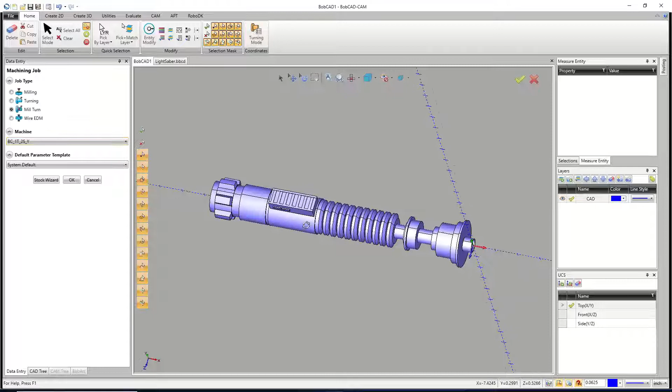Let me go right there, let me get my right view here. There we go. So I'm going to use the BC 1 turret 2 spindle Y, and I'm going to go right here into the stock wizard. I've already set up a tool crib for this machine, so that's one of the biggest reasons I'm going to use it. I don't feel like setting up a whole tool crib again.

So I'm going to try and avoid that. For the workpiece, just going to pick the whole model right there, and that's going to be our workpiece. That represents the final finished part. And then right here, we're going to go create our stock, so I'm going to do cylindrical stock.

I have my part oriented along the x-axis. That's how I like to work on mill turn parts. If you look at some of the examples inside the help system, some of them are standing vertically, so basically your X and Z are already oriented for your part. But to me, that takes a lot more work with pulling edges off and just doing a lot of work. It becomes a bit more complicated.

So I'm just going to start by doing a bounding cylinder. I'm going to tell it that the extrusion direction is in the x-axis, and then I'll tell it to calculate the stock. Now, what I want to pay attention to here is that we get a piece of stock that's actually centered on XYZ0, which means I'm going to have to make my stock a little bit bigger. So the first thing I'm going to do is right here on this XYZ coordinate for the system, I'm going to set those both to 0 so that we're centered right on XYZ0.

What that shows me is that I need to make my stock a little bit bigger. I don't remember if I did 2 1/4. Let's try 2 1/2, that might have been what I used. Yeah, there we go, so we'll go a little bit bigger, and there it is.

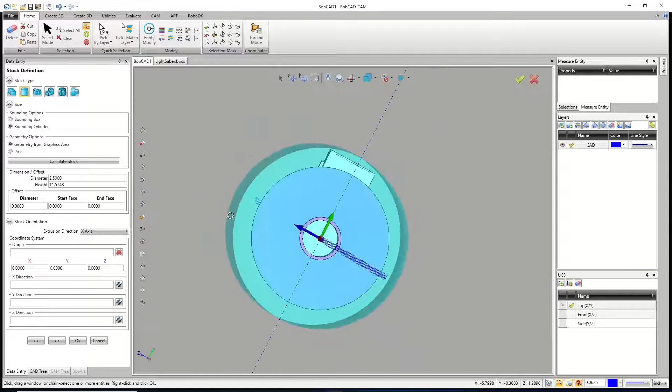So now we have a little bit of meat on top of that, and our part is perfectly centered on the rest of it. So we'll be removing a lot of the material around here with turning. And then a lot of this stuff around this boss here, where turning won't be able to do, we'll do with either a wrapping group or we'll try a 4-axis. I tried it a few ways, so I'll show you a couple of the ways that worked out for me.

And so when I'm done, I'll just hit the next or forward arrow here, and then we have to set up our origin. I always set my parts right here. I always like to set my origin with this view right here, the ISO 1, because it lets me kind of look at the front face of the part nicely. And because my origin is going to be right at XYZ0, I don't actually have to change anything here. I'm just going to go in and say that my X direction is going to point towards this point here, and my Y direction is going to point towards this point right here.

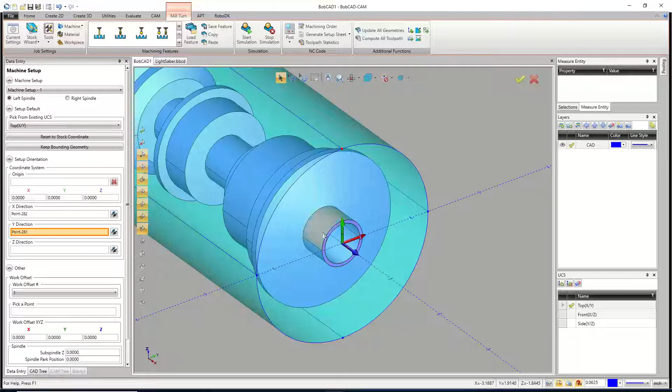One little tip when setting up your origin: if you pick it the way I do, just picking points, if you pick your 2 points, it should give you the right result every time. If it doesn't give you the right result, I would look at your vertex, the origin where this thing's placed.

I've run into it quite a bit on my own parts, but lately doing some mill turn stuff, there's sometimes a slight shift. So what ends up happening is I'm aligned perfectly with the front face of my part. I didn't add any extra stock, I don't really care about facing on this one, but I align it right with the front face of my part.

What ends up happening is if the point you're selecting ends up being just a little bit inside, or maybe you have some facing material left on there, these points end up getting shifted outward a little bit. So you pick your origin at the center of the part, not accounting for the extra face material you have on there, and when you go pick those points, you're actually picking them on an angle to the origin.

If you're only leaving 10 thousandths, 20 thousandths worth of material, I've had many times where you look at your origin and think that looks fine, everything looks clean. Then you zoom in real close, or look at it a different way, and find out it's shifted over just ever so slightly.

That can cause a lot of problems, because when you go to run your simulation or set up tools for it, it's not going to have the right center of rotation. Your stock's not going to look right. If you ever open the simulation and your stock is more of a conical shape than a cylinder, there's a good chance that origin you created is tilted, twisted in some direction - it could be twisted around Y or X or whatever.

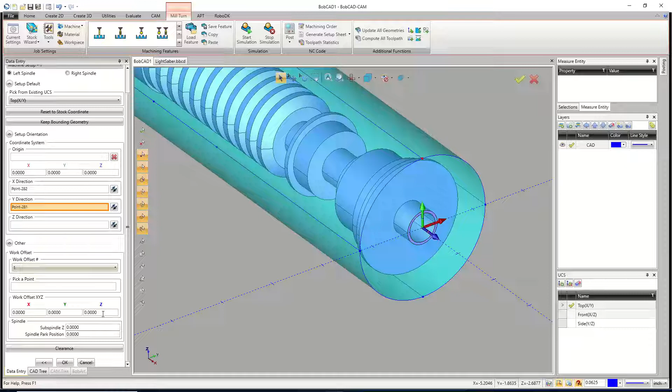Next step is we want to go in and define our work offset. Basically, I want to pull my part out of the rotary, or out of the spindle, so it sticks out. I've just been going with 16 inches - this part's almost 12 inches long, 11 and a half, 12 inches long. So I'm just going to pull it out 16 inches, and then hit OK.

All right, now we have our stock created, so I'm just going to blank out the stock. If you wanted to at this point, this would be a time to go set up your materials, do that whole thing. And then I also have my tool crib set up.

So I'm going to right click on my milling tools, go down to tool crib, and I've saved it, so I'm just going to go ahead and load the tool crib. We're going to add some tools to this anyway, because I do want to do a little face, a little engraving on the face for the whole thing.

All right, so let's look at this. We're starting off, and a little bit of what I ran into was a bit - I was going to use a CNMG, but it really doesn't squeeze down in there too much. This is where I'm talking, we might be able to do some of this stuff, I might have to come up with some other strategies. I'll show you guys what I came up with, and you can give me your thoughts on it.

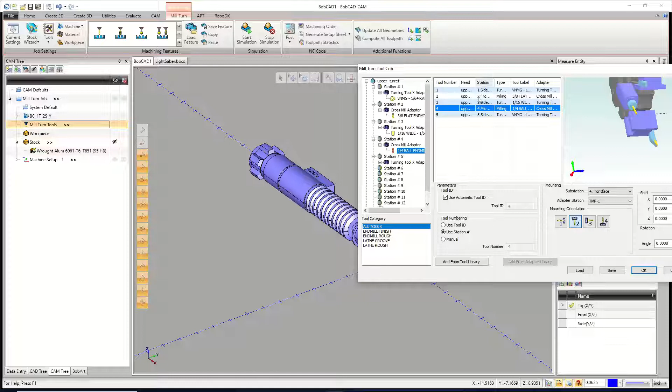So again, may not be the perfect strategies, but you guys will see what we can do and kind of go about it. There's a bit of geometry we need.

First thing we're going to do is create a spun profile. So I'm going to add a new layer, and I'm just going to name it after the feature I'm about to use - spun profile.

And I'm just going to go up to Create 2D. Right here we have spun profile. I'm usually going to switch my tolerance to about half a thou. I do that just because that's the same tolerance I use when I machine, so I might as well use the same tolerance when I'm pulling wireframe off. I want to go along the X-axis, and my origin is at XYZ0. So I should be able to just pick the whole part and hit OK. And when I'm done, we'll cancel out.

If we turn off our CAD, we're left with all the geometry that we can machine. We have a lot of grooves on here, and I did have some tool paths on my other part that I cut those grooves with. But the VNMG has a really steep angle on it, so we can actually get into a few of these areas. Again, maybe not the best strategy, and I might need to go with more grooving, but I want to keep it simple for the tool path.

So I'm going to start off by right-clicking on Machine Setup 1, and I'm going to go to my turn features, and I'm going to say Lathe Turning. Now I'm going to select my geometry, and I'm going to start right here.

Now this section I might do with a groove, I might do that with an end mill - you know, it's a mill turn, we've got a lot of choices. But I'm not going to do this hole in the center right away. Maybe I'd need to, but I'm going to start at the front face, and then I clicked on that - no shift clicking or anything. At this point I've just clicked on that.

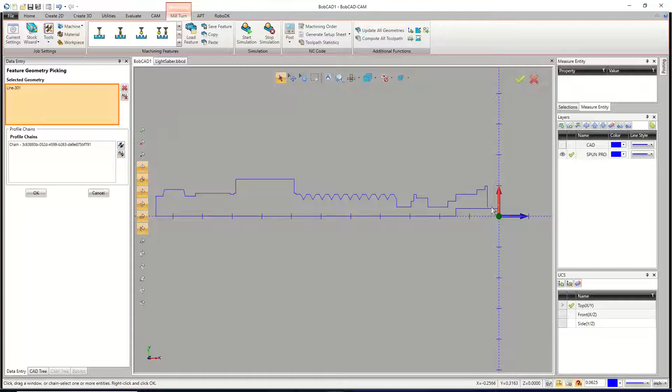Now what I'm going to do is go all the way to the end of the last line here. And when I say the end of the last line, I mean past the midpoint of the last line. So I'm going to go right here, then hold Shift and click, and it'll chain my two clicks together - my first click on the front face, and then my back click here. That just selected all of that.

And so now I'm just going to hit OK, and then hit Next. Right here we have our feature page, we have our machining strategy - or I don't even know why I'm reading that. We got our rapid plane right here.

The OD feature type - yeah, we are cutting on the OD, so that's fine. It's going to be region 1 for this one. We will use region 2, that's when we come back from the opposite direction and kind of clean up. I could tell it to cut from the stock. This is our first initial roughing pass, so I want to let it rough everything that it can.

I'm even going to add some extensions. At the start I'll just do a little 1/4 inch or something. At the end of it though, I want to cut off a little bit - I want to go past the end a little bit so that I have room for coming in from the opposite side and all that. So I'm just going to set the distance at the end to 1 inch, and then I can go ahead and hit Next.

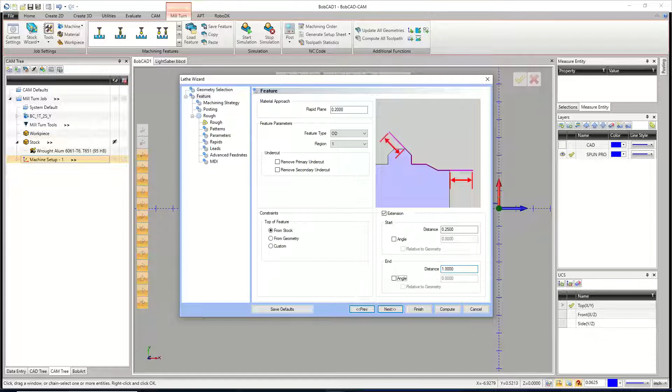Now for the strategy, we are using this for just a rough. We could put a finish pass in it - really depends. We are going to finish it again, so we might as well finish it from both directions. So we're going to do our rough with the VNMG and our finish with the VNMG.

So we're going to keep the same tool. And then what we'll do later on is we'll be able to copy this whole tool path and use it to cut the other side, so cut from the other direction. So might as well put the finish pass in. Posting, depending on your post, you could run separate moves or canned cycles. I'm going to go with separate moves.

I'm on my upper turret main spindle. And right here we get to our rough. So anytime you see a -1 as your number for your tool, it's not a tool that you've chosen. So we want to go and fix that every single time. We're going to go up to the tool crib. And for me, I'm going to go ahead and pick tool number 5. It's this VNMG that's on the correct side. Tool number 1 there is the one on the back side. So I'm going to go tool number 5, hit OK.

And we could show our holder. So that's what I'm looking for. I needed that steep angle. And again, this is the path that I'm not super happy with for now, but it actually works its way into a lot of these areas. I think the most important part is our depth of cut's got to be right, all that stuff.

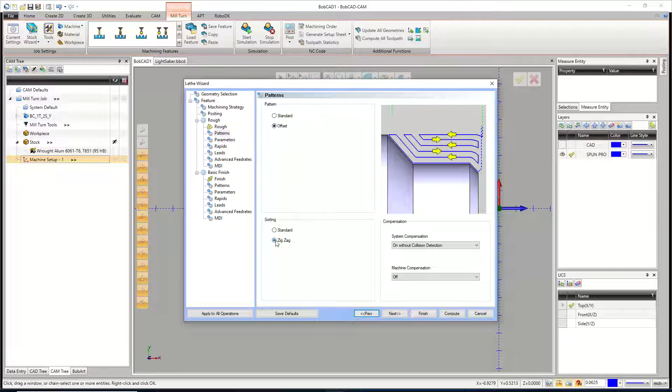So for the patterns, we got our standard pattern with a standard sort. We could also do an offset, but I'm not a big fan of the offset too much, only because if you look at this first pass, the second pass has to take out all that material. So sometimes with the right or wrong kind of features, you can end up being very aggressive on some of your cuts until you kind of work your way into the final shape. You could also do a zigzag, which my tool's not really built for. So I'm going to go with the standard.

And for me, I'm going to use compensation on with collision detection. And I'm going to tell it to use the tool holder. So this is actually going to avoid the areas that it's not capable of cutting. And that's why we're going to come back from the other direction to clean it up afterwards. Next, we have our parameters. Depth of cut. This is where I would want to set up what I'm comfortable with, especially with this being kind of an odd tool path. You'll see the results here in a minute. But I'll leave it at 50 thou for now.

I'm going to overlap to the previous cut. I always like to get that little bit of a blend between the two passes. So instead of just doing no overlap and leaving a very rough, bumpy surface, this to previous cut should blend those lines a little bit better and still leave our finish allowance here. So to previous cut, I use that almost anytime I'm doing a turn feature. A lot of times your first option is, if you do a face, it's an option inside of facing, but for facing, it's not something I really need. So it's not something I'll mess with now. Just going to leave it on to previous cut.

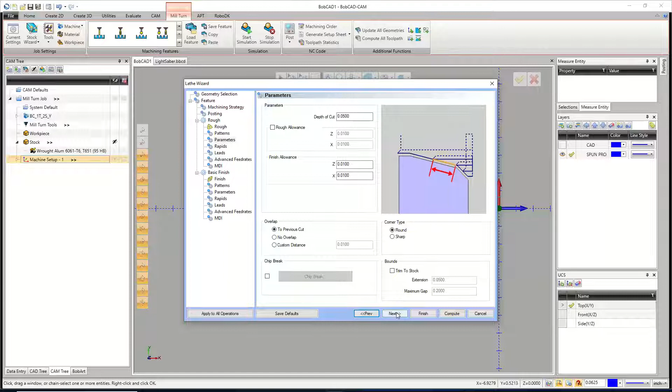I'll go with round corners for my corner types. And I currently don't have a model that I can use to really trim the stock to. So I'm going to leave that off for now and then just hit next. Right here for the rapids, if you've seen me do lathe or mill turn before, you'll know my goal when I'm going through a tool path is to change the things I know I need to change. The tool I need to pick, depth of cut, step over kind of deals. Those are the things I'm defining.

When I'm working on the OD of a part, I'm really not that worried about where the rapid moves. Now, if you have a different home position, absolutely put the right home position in. But I'm not too worried about it. I'm going to use the default rapid on the approach, and the default rapid on the exit. That might not be right, okay? That might be the wrong answer. But as of now, I have no idea what the right answer should be, and that's a pretty good way to start. I'm going to start by going with just the defaults. If they work, great. If they don't work, I can always come back and change them. But again, I want to leave as many things as a default as I possibly can.

For this one, I'll just hit next. And it's going to be the same with the leads. I don't know if a parallel lead is going to cause me any problems or an angle lead out is going to cause me any problems. So I'm going to leave it. I'm just going to hit next.

For the advanced feeds, we have our convert rapids to feeds and our lead in and lead out feed rate percentages. So the percentage of your cutting feed rate used only when leading in and leading out, or converting all your G00 moves to G01 moves, where you're then going to define the rapid feed rate essentially. That's to help with an issue called dogleg rapiding. So if it's not something you're dealing with, I wouldn't worry about it.

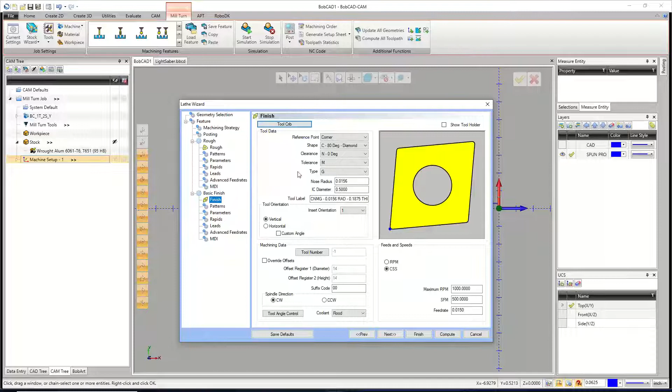The MDI, I have nothing happening after this operation. This is a very simple one. I could have used a one turret, one spindle because I could do most of the geometry from here and then it's just kind of a cutoff. So yeah, next. Right here for the finish pass, again, we've got to go look at the tool number. It's a -1. We go up to the tool crib. We're going to go to the lathe rough here and then pick tool number 5 once again and hit OK. So there's our VNMG a second time.

This one, we have our choice of how we finish it. We could either do continuous, start at the front face and go all the way back, or do an alternate where you're going to cut the turn diameters and then the face diameters. I'm just going to go with the continuous. Compensation is going to be on with collision detection using that tool holder there. And then for the parameters, this is a finish pass. I don't have really anything to clean up. It's just going to go do one pass and give us a nice clean finish.

Rapids, going to leave them. Leads, going to leave them. And the advanced feeds, no changes there. Finally, again, MDI. I'm not doing anything before or after this operation. So I'm just going to hit compute. It'll take a second to calculate. We'll give it time. And when this is done, the next thing I want to do is go and save. So I'm just going to do a save as. Yep, right there. We'll call this lightsaber 2 and save.

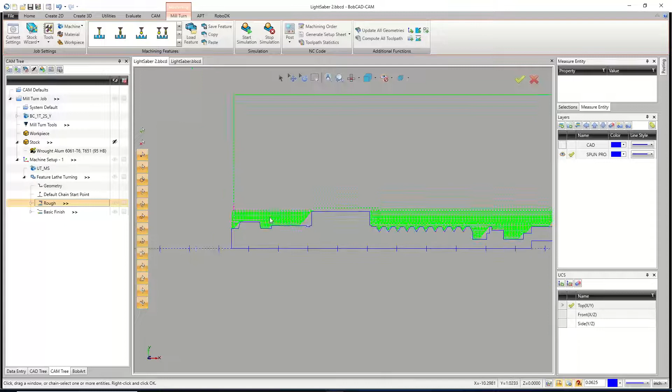So what we now can see is the areas where the VNMG couldn't really get into. All right, so you get those cuts there, and those cuts there, and that kind of stuff there. So what I want to do is save the result of this. Because inside these features, on the parameters page, there's an option called trim to stock. But you have to apply the stock to it. So if you expand the rough or the finish, you actually get this operation stock. I don't have the operation stock right this second, but I've been wanting to try something, and I figured now's a good time to do it.

So I'm going to go to my simulation. I'm going to say Start Simulation. And I'm going to let it run. We're going to see what kind of results we get. Again, the toolpath may not be something we would want to run, or we might have to do some different depth of cuts, depending on what we're doing. But I'm just going to go in and we'll see it rough this out first.

So I'll say run. Now, there's a feature in the system that I haven't gotten a chance to use too often because I don't work with STLs very often. But inside of the Create 2D tab in 34 here, we added this feature called Silhouette. And so what I want to try and do is we'll let this thing finish running. I want to save this stock that I have here as an STL.

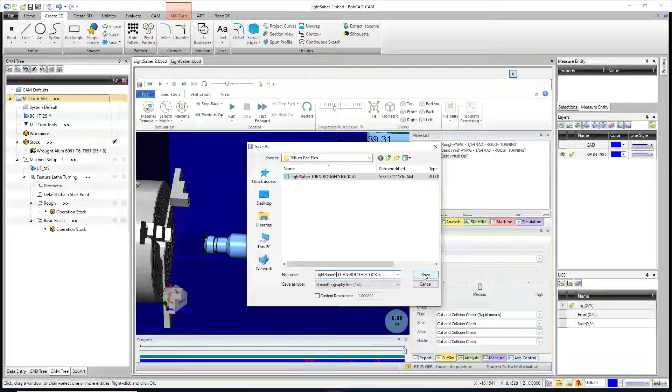So I'm just going to go right over here, expand this out, and I'm going to go and save that stock. I already made some. This is a different one. So let's do Lightsaber 2. That's for my other one. I was messing with some other settings. And then let's do a custom resolution of 8 thou. There we go. That should be fine. So the reason I'm using this STL is that it represents my stock.

Now, for those of you that are familiar with the milling side of BobCAD, and if you've ever done any saved stock for that, then you'll know that normally when you set up operational stock, you can select an STL file. The thing is, this one doesn't let you select an STL file. It wants you to just select wireframe.

So what I want to try and do is I'm just going to go to File, Open, or just Open here. I'm going to turn on the STL file type, and I'm going to pick that Lightsaber stock. And so there it is right there. You'll see it's aligned with where it came out of the machine, kind of how the machine had it oriented. So what I'm going to do is rotate it so it matches what we have here.

So I'm just going to go Utilities, Rotate. I'm going to take that part and I'm going to go with a Y 90. So Y positive 90. Remember the direction those arrows are pointing in, that's how you can tell which direction is going to be a positive. And so we're going that way. So there's our part. I'll hit OK, and I'm going to cancel out.

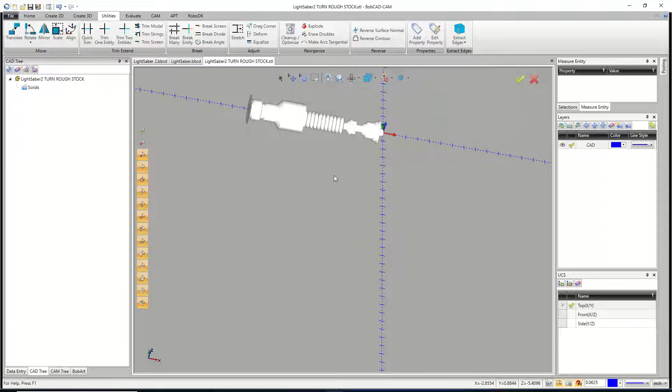Now, one thing you can see is I didn't extend the stock to make it 16 inches long. The stock will be 16 inches long, but I have a little cutoff, and you can actually see I missed a little section there, probably not going back far enough. Shouldn't be a problem. Hopefully the system doesn't recognize it as a bunch of material there.

But now what I'm going to do is add a new layer, and I'm going to use this as the silhouette layer. I needed to know how to spell it. S-I-L-H-O-U-E-T-T-E. So what silhouette is used for is we're going to look at this thing from a top view, and I can go to silhouette. The problem with STL files is there's no edges on them. So we don't have the ability to extract the edges off of our STL files. So this silhouette feature allows us to do that.

So the method we want is, let's leave it on enter. The direction is the Z-axis. I want to merge all shapes. I don't really care about internals. And yeah, we'll put an arc fit on it so we get some little radiuses. Not that it matters, we're really using this for stock. So I pick my model there, and I'm just going to hit OK. And we'll wait a second.

And what we'll see here is if I turn off my CAD layer there, I'm left with the wireframe that should be showing me the kind of perfectly clean version of this part. All right, so now what I have to do is create a line that goes right down the middle of that piece of geometry. So I'm just going to say it starts at X minus 12. That should be more than enough. And it goes to X1. That's fine. We'll hit OK and cancel out.

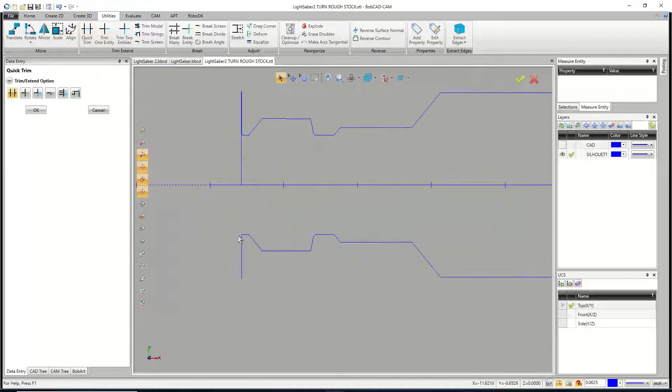Now, the reason I did that is because I'm just going to go to Utilities here and trim off right at the middle there. So I'll trim that. And then right here, I'm also going to trim all of these little entities, and this little guy here, and that little guy right there. I'm going to join that line to there in a second. I just want to trim off the end of this right here, and then that's it.

So now I think I should just be able to delete that middle line, and then I'm going to just delete the whole bottom half here. Basically, we're going to give it a new revolved shape that it's going to use. So now I can go up to Utilities, Trim Two Entities, and I'm going to join these two together like so. So that wireframe should represent the stock fairly well. I didn't go too crazy on my tolerance with the STL because then you end up making smaller parts. But I'm going to select the geometry.

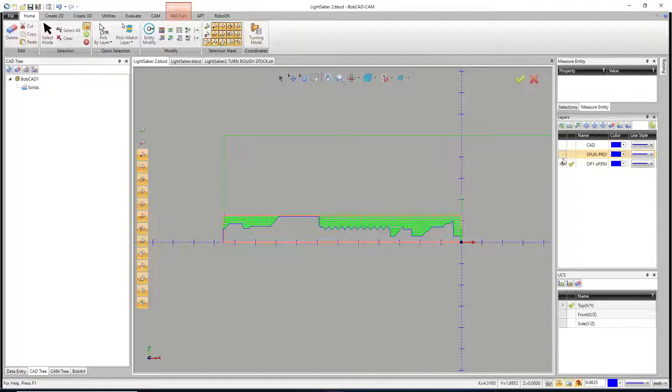I'm going to go up to Home and Copy. And then I'm going to go over to the lightsaber here and add a new layer. This is going to be called op1 operation stock. I don't think we're going to be doing another operation stock, so this should be the only one we need. And I'm just going to put that there, Home tab, and Paste. And that's what I'm left with. You can see it fits the shape of that toolpath almost perfectly.

So now what we can do is go to our CAM tree, and you know what? There might be another way to do that. I'll show you guys one other method that might work. We'll find out. I don't know.

Actually, I don't think I could do it with turning. Edit. Okay, never mind. There's not a second way I was going to do it. So now that I have this new geometry here, I'm going to right-click on this feature lathe turning, and I'm going to say copy. I'm just going to copy it. I'll repick geometry. And then I'm just going to paste it down right there.

So we need our spun profile again, and I'm just going to go in and pick the same geometry as what I had before. So I'm going to right-click on geometry, say reselect, and I'm going to go from this face here all the way back to here. And I want to make sure that my chain is going in that direction. So if you click on your profile chains, you'll see this one starting at the front face and going back. I want to reverse that thing and hit OK.

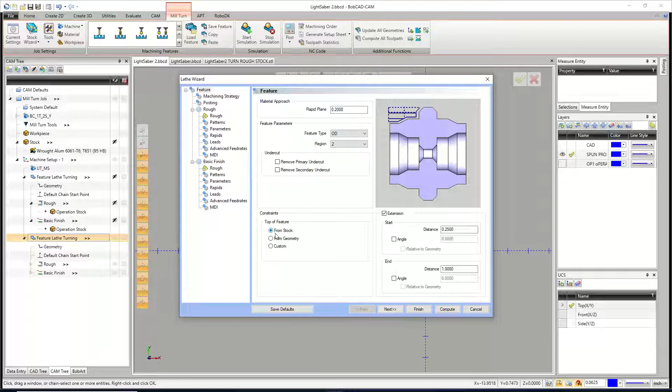Now the next change we need to make is we need to edit our feature and change this from region 1 to region 2. And this is partially going to start doing the tilt of the tool, the rotation of the tool, but I'm going to go pick the new tools anyway. I'm going to tell it the constraints, because I've removed a lot of the material here, I just wanted to cut from the geometry. And then I'm just going to go next until I get to my roughing tool. And you'll see, once again, it does have a -1 on it.

I'm going to go to the tool crib. I'm going to pick tool 1 there, which is the proper tool facing the right way, and hit OK. Now on the patterns, all the rest of the settings we're going to leave the same, except I am going to tell it to trim to stock. I have to go define that stock, but I'm going to tell it to trim to it. All the rest of this is going to be the same.

So when we get down to our finish pass, we're going to go in, pick tool number 1, hit OK. And once again, on the parameters, I'll tell it to trim to the stock. And next, really, that's it. So I'll hit finish instead of hitting compute. And this is a great time to go ahead and save the part if we wanted to. And then right here, I'm going to expand the rough and pick my operation stock. So for this, I'm going to turn that on, and I should be able to just hold shift and pick that shape, I believe. Hit OK.

And then if we go and compute this, I don't think I need it on the finish pass too much, but I'll go and compute this and see if it recognizes those areas that need extra cutting versus the areas that don't. I may also just need a solid model. I didn't realize I could pick solids for that, so I might be able to just spin that, but nope, that looks pretty decent. So if we look at our tool path, we're just going in and cleaning up the areas where, when we were coming from the other side, we couldn't reach.

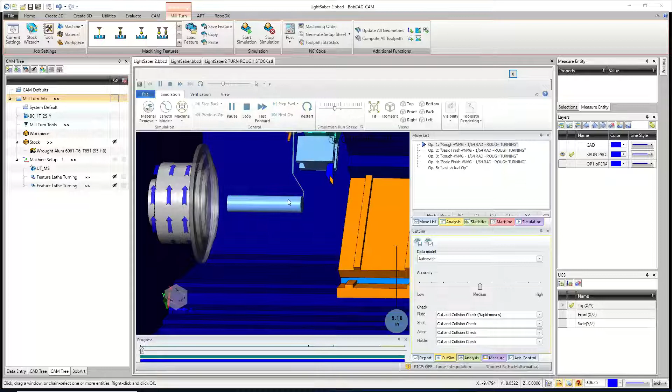All right, so there it is, and we could go ahead and shrink these up, and I'll blank that one out, and we'll go ahead and just say save. And so just with the two VNMGs, both facing the ways they are, we'll see the results right here. All right, so that's running at a fine speed here. Maybe a little faster. Yeah, we'll go a little too fast.

All right, so right there is where we're cutting. And those are the cuts. I don't know if we'd do that. I mean, maybe cut them with a little groove tool or something first. There's our finish for that side. And then we have our rough.

And looks like we gouged on the back side of those teeth there on both of them. Yeah, that's not getting in there the way it was the other day. So maybe that's from that. We can remove that area. But you can see the basic shape starting to come along. And yeah, we're getting close. For now, let's think. We roughed it.

Why are we gouging on that? Let's take a look. Oh yeah, that's why. Let's backplot this. It might be our lead length, something like that. Where is it? Backplot right there. So I just want to get to the point where we're seeing some of these guys get cut. Wherever that happens to be, right there. So let's take a look at it.

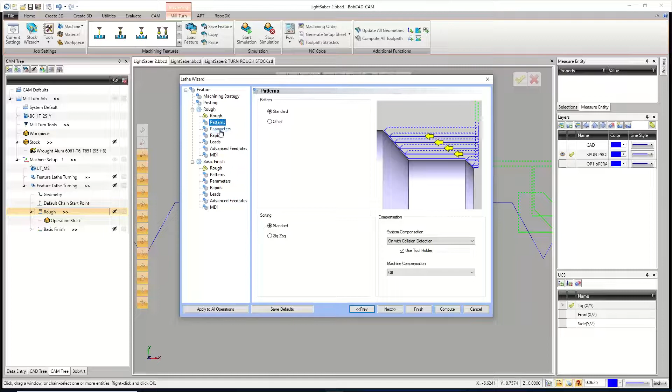So that's why we're gouging right there. Could be a length that's extended. Let's take a look at that. It's on the rough and the finish pass. Finish pass might be okay. All right, so let's look at our rough, say edit, and let's see what's causing that. Why is that happening over the other one? To previous cut, let's try. Why did that get reset?

I changed that setting earlier on the first toolpath, and when I copy and pasted it, it reset. I'll have to test that. That might be a problem with the system. Let's see here if this can get us out of there or not, or if it's going to just gouge that thing again. Nope, still gouging. Why is that?

Is that my leads? Let's try the leads. All right, so I got a parallel lead in, an angled lead out. Let's do a 25 thou, and then we'll angle out. Let's see. I don't know if that's what's causing it or not. Yesterday, I'll show you guys the one I was working on yesterday and a little bit today between my trainings. I didn't do the stock that way.

Ooh, that looks a lot better. Let's just backplot that real quick. Get into where they start happening. There they are. Yeah, we're going to clip that corner right there with the holder, as you can see. So 25 thou still not quite enough. Really, though, where's my finish pass? Why did that not calculate?

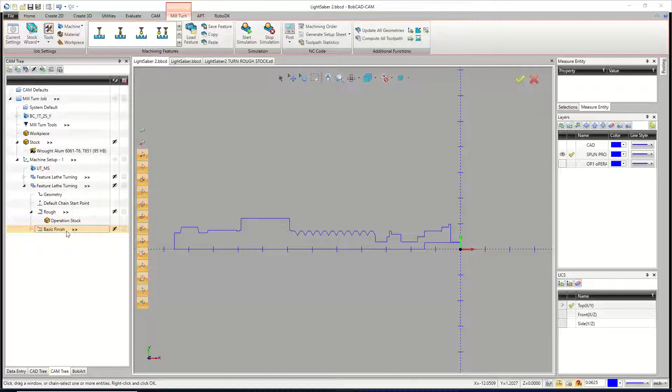What in the world? I didn't change anything on this, really, did I? Oh, no, let's not trim to stock on the finish. Okay. And the last thing I'm going to change, I'm going to make this 15 thou. All right, here we go. Compute that. Yeah, the way I did this yesterday was I didn't do the operation stock, so it just kind of reran. And then the way I set it up was on that first page of the toolpath,

you have your, what's it called? It's right here, the feature page. Pretty much your first toolpath, you're always going to run from stock. Your facing pass, if you do a facing pass first, that's usually going to be run from stock. And then your first initial turn rough, turn finish that you're doing, that's usually going to be from stock as well.

But now that we've removed a lot of that geometry, the way I did it yesterday was I just used from geometry. And so I end up cutting a lot more. I'll show you that example. So there is a difference between my initial thoughts and how we're doing it now. So, kind of going on the fly here.

But here it is yesterday. That's the rough for that. So I ended up cutting a lot of the same areas. But by doing that, I didn't have any of the gouges. You could see it kind of avoids the gouges. But this one looks promising here. The finish pass is going in. Hopefully not clipping anything.

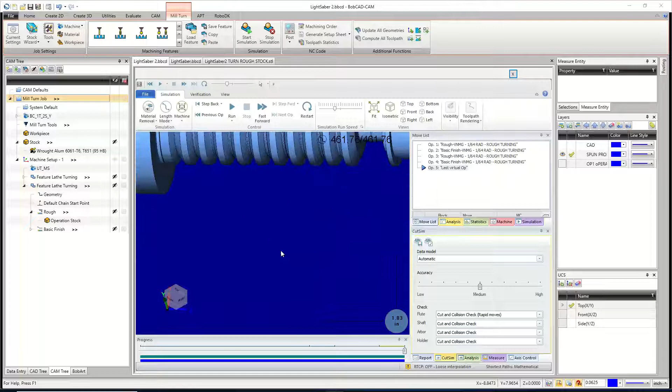Looks all right. Looks like we could clean up the insides of those a little bit, maybe with a little grooving tool or something, because you could also do every one of those as a groove. You'd have to get the specific grooving tool, because I do have flats on the bottom because I can't get all the way to those points.

There it is. So that's our overall OD to the part. And then if we turn our CAD on, we can see now it's time to start doing some of this. We got one little thing we'll do. We'll go and clean up.

We'll go and clean up the groove real fast, this little guy right back here. So with that groove, I'm just going to right click, go down to lathe features, turn features, lathe groove.

Select the geometry - I'm just going to pick those three sides of it. If you need to, and sometimes you do, you could also go and pick these ones, that way it recognizes that there's a wall here and we'll offset from that.

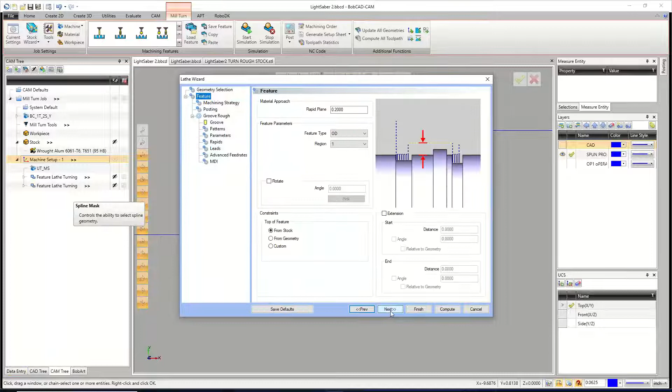It should be fine, we're going to try it this way first. But once in a while you'll have to potentially pick geometry like that. I'm going to go from the geometry of my groove so it doesn't waste a bunch of time trying to cut a bunch of air.

It's an OD groove, region 1. For the machining strategy, this one really probably only needs a finish pass because we're using the VNMG and getting into that groove just a little bit. But I'll do a rough and a finish.

We'll go ahead and pick our tool. I got the 16th inch wide here because that groove width right there is like 113 thousandths - it's not much, so got a 16th.

For the patterns, going to go with a standard cut and a standard sort. This is also like a single pass maybe for those grooves - those other grooves we had down there, the pointy ones, you have a tool that fits that shape. You can actually do it as a single pass and just have it plunge in, cut the groove, and move to the next one.

I am going to collision check using my tool holder, just in case I accidentally pick the tool where the length of the holder ends up being too short. By using this, it will adjust and make the grooving tool only cut what it's capable of reaching. So if it didn't have the reach, it's not going to cut it.

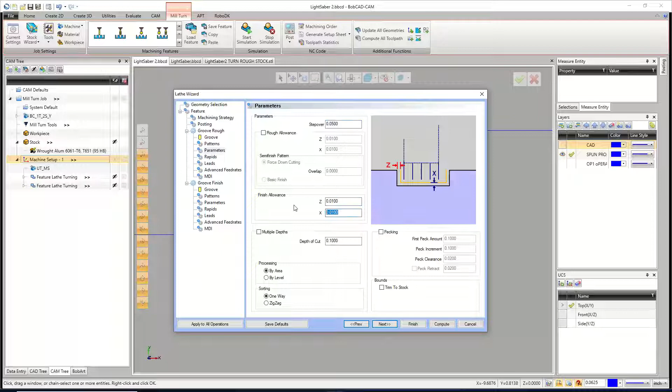All right, parameters - got our 50 thou for our step over. We'll use the 10 thou allowance there. I'm not going to do multiple depths - this is a real tiny groove anyway.

Rapids, no changes. Leads, going to go with the defaults. It's parallels, the only one for the rough anyway. Advanced feeds, no changes, and MDI, no changes.

So right here we got to go pick the same grooving tool. So tool crib, tool 3, hit OK.

For the patterns, I'm just going to do a basic finish. I'm just going to run it one way instead of meeting in the middle - it's a small groove. And I'm going to do collision detection again, using the tool holder.

So if I did accidentally pick a tool that has too short of a stick out for the grooving insert, then this will adjust it and make it cut as much as it can without crashing that holder. Parameters, it's a finish pass.

We're going to 0, and then we get to the rapids, no changes. Leads, just going to try the defaults. Advanced feeds, no changes, and finally the MDI.

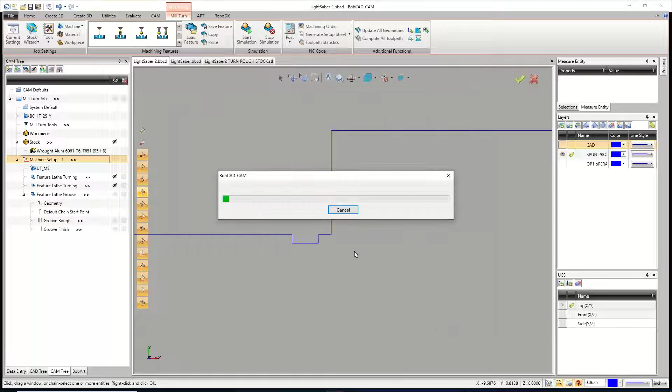Now, when we're all done, we can go ahead and hit compute, and it's just going to calculate that groove real quick. Should be a pretty quick one. Yeah, there it is - there's our little groove. And I'll give it a save.

All right, so now we can turn our model back on. And that's everything that we need to worry about for turning.

All right, so now I'm going to go to an isometric 2 view, this one right here, or it's on the list right there. The shortcut for ISO 2 is Control 7. And then I've also gone in and set up a shortcut for this one, this ISO 1. For me that's Control 9, but I had to make that one.

So if you ever want to make a shortcut, you go up to your settings, go down to Customize Shortcuts. If I scroll down, I can go to ISO 1 right here and add a new keyboard shortcut. And Control 9 is not used by anything in BobCAD - Control 1 through 8 is for a bunch of different views, but Control 9's not.

If you get a lot of SolidWorks files, I found that the isometric view that they use as their default is this Control 9 one, this ISO 1. We use ISO 2 for the most part because we're looking at kind of the X and the Y and the Z right here.

But there it is, let's blank that out. All right, so let's go ahead and give this a shot. We're going to take this right here, and we are going to extract the edges off of it.

I'm going to pull the wireframe off of it, and there's a bit we have to do with this. I'm going to start here on a top plane, but I may be better off doing it on a front plane. I'll do it on the top plane first, and we'll probably end up rotating it.

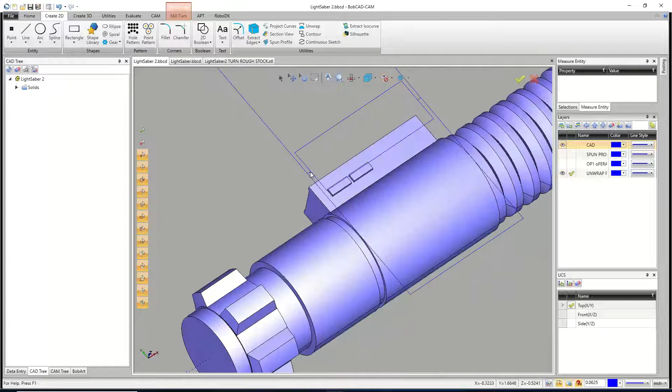Now, the problem I'm going to run into is I'm using, I think I set up for a 3/8 tool. I don't have that much space right here. Those lines are not, there's not 3/8 there. So what I'm going to do is start off by just deleting this and this.

Just delete those two, and then in this feature here, I'm going to close off the geometry. So I'm just going to close this from here over to here, so we have just a closed shape. Now, what I want to do is on one of these sides on the long ends, I want to go a little bit further out.

I want to extend that one out. I also want to extend out the sides. We're going to use a 2-axis toolpath for this, so I'm not worried about it seeing this geometry and trying to cut into that groove or drop down and machine anything over there. Because of this being wireframe, being a 2-axis, we'll be able to tell it how deep we want to cut.

So I'm just going to go up to the Create 2D and Line tab, and do line parallels. Now I have a 3/8 tool, so I'm just going to use 3/8 as my value for my distance, and move this left side line over. This side didn't go the right way. This guy is going to move over.

Okay, that's good, I guess. That one's going to move over, and then I'll have this one come out. So this extended piece here is essentially like saying we want to go past the meetup point. I want to go past where these surfaces end and kind of blend between them so we don't miss anything.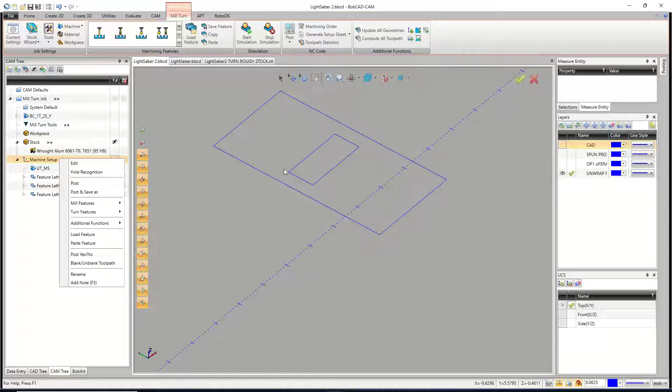So now we can go in and do our mill features. I'm going to go ahead and do a... well, before we do our mill features, I apologize, I have to go set up a wrapping group because we unwrapped our geometry. So I'm going to go right here to Additional Functions, add a wrapping group. The geometry we're working with is not wrapped, but I don't remember the diameter and it didn't take it.

So I'm just going to turn on the model, go to Evaluate, Measure 1. We're going to go ahead and pick that arc right there, and that's going to give me the diameter, 1.4961. So now I'm going to go in, edit the wrapping group, set the wrapping diameter to 1.4961, and hit OK.

Now the next step, and this is the thing that I always forget myself, and you guys may as well - I don't know if you're doing any wrapping with mill turn. Your wrapping geometry that you create has to align with or point towards your x-axis here, because the tool we're going to be using is coming in line with that x-axis, so I want to be able to come in and machine that pocket around there.

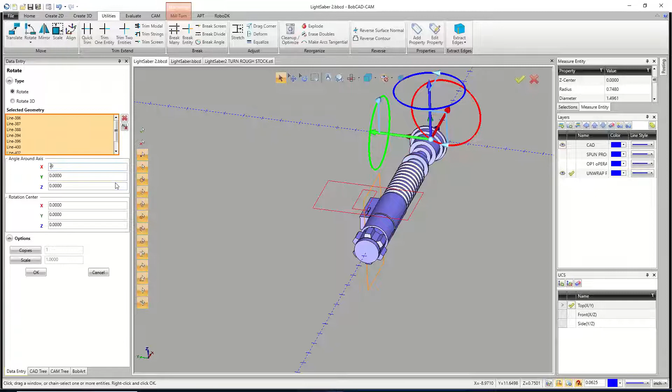So what I need to do is take this geometry and rotate it 90 degrees. I'm just going to go to Utilities, Rotate. I'll hold Shift and pick the inside shape and the outside shape here, and from the center I'm just going to go with an X, minus 90 here. So it's going to be sitting just like that - X is going to be minus 90, or 270, either way. Hit OK, cancel out, and you can see what it's doing.

Now one of the problems we might have is this could end up in the wrong position because of that rotate - it might actually end up on the bottom of the part when we watch it in the simulation. Yesterday, when I was messing with this thing, I ended up doing all my unwrapping right here, and the whole part was actually standing up vertically. So when I rotated my geometry like I just did, I actually ended up rotating the part and the geometry together.

So again, we might have a little bit of an off cut right here, but if that's the case, what we can do is shift this geometry up - take this geometry and find out basically a quarter of it, and move it up. I'm thinking we'll be 90 degrees off on this. So to find out, let's go ahead and do our tool path real quick.

I'm going to do just a mill 2 axis, select geometry. Now you'll know you got it in the right position when you pick the geometry and it shows you the proper distances there. I've had other times when I go to do this and I didn't - let me restart this. I've had this happen many times where I go to pick the geometry and it shows up as just a single line with a half-inch depth or whatever. But really what's happening there is my geometry is not oriented to the correct axis.

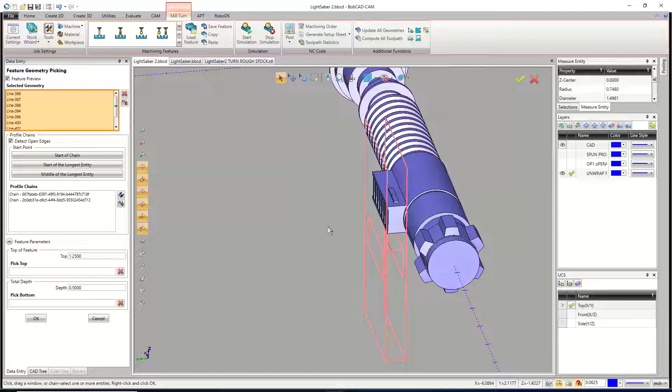You want this stuff sitting perpendicular to your tools that are sticking out of the turret. So that's how we're going to set it up. We got our 2 different chains there. Don't really care about the leads right now or start points so much - we'll put our start point in the middle there.

The top of the feature is going to be off of this surface here, so we're going to go right there. The bottom of the surface, we're going to go to right here - so that should be our depth, 4562, we'll hit OK. Next, so we got our top of feature and our total depth.

That's all fine. Right here, we're going to go with pocketing, which gives us a pocket and a little finish pass - we're not leaving tabs. For posting, just going to double check everything - got work offset 1, main turret, upper turret, main spindle. The multi-axis posting, no changes there. For the pocket, now I have to go up to the tool crib and make sure to pick that 3/8 tool that I got right there. So I'm going to pick that, hit OK, and then go next.

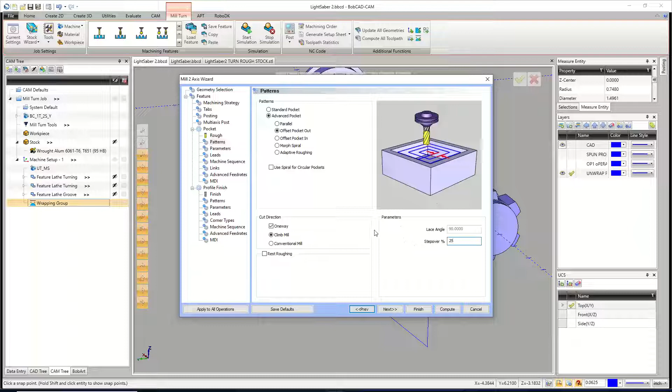Now for the pocket, I'm going to go with an advanced pocket - we'll do just an offset pocket out. Step over, I'll go something like 25%, no reason to be crazy. Right here we get to our parameters - yeah, I am going to leave 15 thousandths for the finish tool to clean up, and I am going to do this in multiple steps. I'll say let's do 0.4562, we'll do it in 4 passes, just to work our way down there.

For the leads, no changes - I'm going to leave it on plunge. Machine sequencing, it's only 1 pocket, but I usually just turn on optimize just because. Next, again we have our links, no changes. Advanced feeds, no real changes there. Again, a lot of the settings that we're going through, I'm intentionally kind of ignoring because I don't really need them - there's my 3/8, okay.

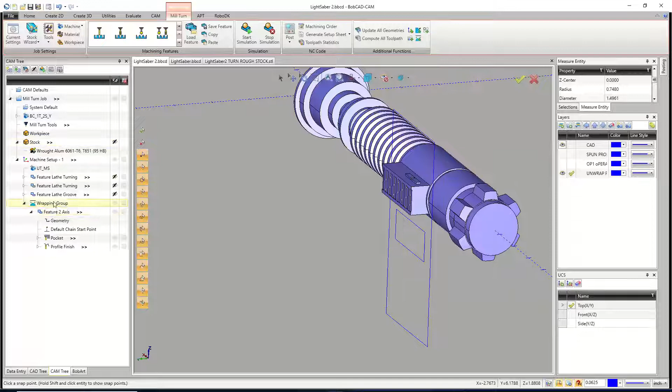And right here, we got our compensation. Parameters, we'll go full depth this time. Leads, we could play with some leads potentially, but I'm not going to do anything right now - and that's really it. All right, so I'm going to say finish first just so I can save, and we should see it because on our wrapping group, when we edit this, our geometry is not wrapped - we've flattened it, but the toolpath is going to show as wrapped. So I'm going to go ahead and compute this thing.

And we'll see, there it is. Now what you'll see is in this area here, that's where that pocket is supposed to be. That's where we're actually going to be cutting this thing off according to how it's sitting now. So what I want to do, and this is a test I haven't done before, I'm going to go to Evaluate and Measure 1, and I'm going to grab that line right there. And I just want to find out how long it is.

It's 5. Let me move this down a little bit. 5.075. So I'm just going to pull up my calculator, wherever I put it. There it is. And I'm going to say 5.075, and I'm going to divide it by 4. And so what I want to try, just as a shot in the dark, we're going to take this value right here, the 1.26875. I'm going to just copy that.

And I'm going to translate this geometry up that distance. So I'm just going to go Utilities and Translate. I'm going to use that value. I copied it a second ago, so I'll just paste it in there. And then I'm just going to pick that and that for the geometry. Oh, went the wrong way. Let me put that there. We've got to go in the Z. I apologize. Right there. So that's going to shift it up so that it's centered on that, I believe.

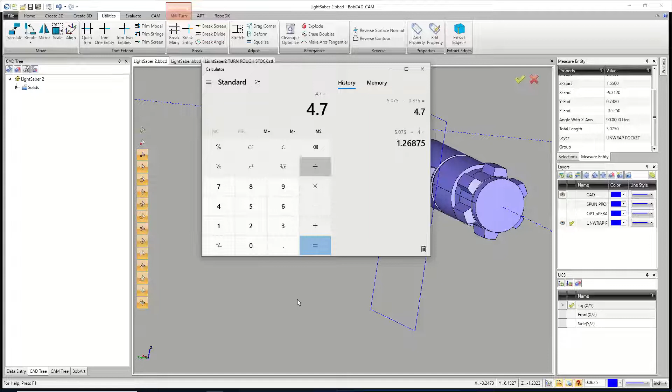Oh, no, we have a little bit of length left. I added geometry onto it. I added what? A quarter? What did I do? 3/8? I added 3/8 onto that end. Let me try this one more time. Let me do some math, a little bit different. 5.075 minus the 3/8 I added, and then we divide that by 4. So let's say 1.175 and see what that gives us.

So Y is going to be, or Z is going to be 1.175, and I'm just going to pick those two. And that looks a lot better. You can see that that rectangle aligns perfectly around there for us. And so I'll hit OK, cancel out. And then on my CAM tree, I'm going to right click on the word geometry and say reselect. It's going to learn its new position, and I'm just going to hit OK. And now we should be able to compute that tool path. And if we look at it, we now have that gap right there.

Now, one thing I'm noticing, we don't have our finish pass. Our finish pass is on the wrong side, I believe. Maybe not. What is it doing there? Oh, that's our full finish on that. I guess it is doing some finishing. That should be fine. Let's go ahead and save this thing and post it.

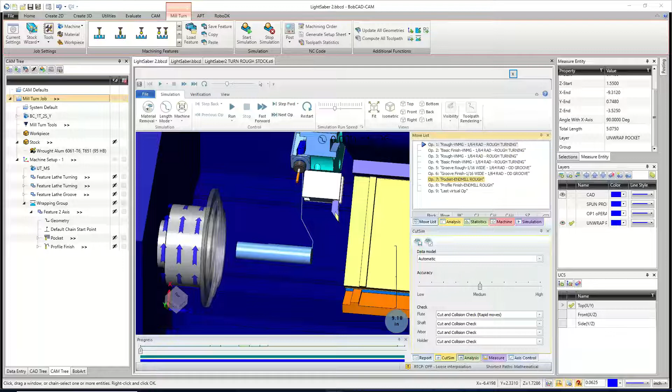Now, yesterday when I was running into this, I worked on this one for a minute trying to get a good finish out of here. So we're going to come back and kind of remachine it. I tried using the 4-axis rotary advanced rough and finish. That gave me some decent results. But what you'll see here is it leaves these big kind of angles on the part that we have to take care of afterwards. So right here, I'm just going to fast forward down to our pocket. And then run.

So you'll see it is treating it kind of like you would a pocket, just a wrapped up pocket. Excuse me. And we're getting nice clean cuts on the edges, mostly because of that, what do you call it? Man, I can't remember what it's called. Oh, the overlap we did where I extended everything out by 3/8. So that's why we're able to get over those edges and get a nice clean finish on those ones.

So I'll just speed this up a bit. And then, yeah, that's, I believe, where it's at. Right there. And yeah, so it's just going to do that. Let's speed it up a bit. And on here, I'm going to turn my workpiece on so that we can see what's really left over when we're done.

So the pocket comes out, that big pocket we did comes out looking great. The problem is, let me turn this stupid thing off. There we go. The problem is if we look at this right here, it left all that material on there.

So the first way I tried to do it was I used this top surface as an index, and I think we're going to do it that way again. I'm going to use this top surface as an index so that when I call out this index, that wall should be kind of straight. Maybe we'll just use a ball mill to clean up that bottom, which I may or may not have. I can't remember if I got a ball. I think I got a 1/4-inch ball mill in here.

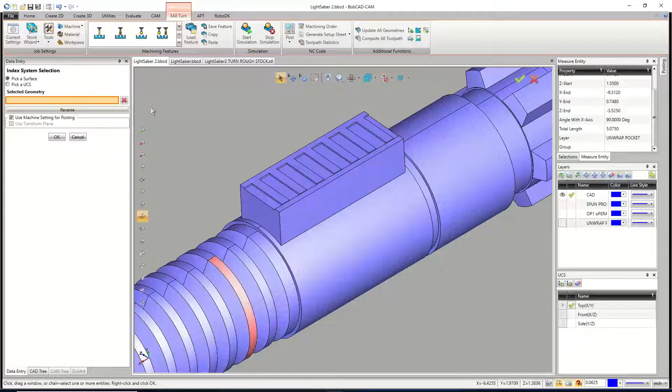So now what I'm going to do is, I don't even need a layer, an index. So we're just going to right click. We'll go down to our additional functions and add an index. From there, I'm just going to go ahead and pick the top surface there. It knows what axis to come in from, and I'll hit OK.

Now, I'm then going to right click on that index system and do a mill 2 axis. We could potentially do a mill 3 axis. We'll play it by ear. Really, I'm just going to go from there to there. I want the bottom of the job to be down to there. And yeah, there it is.

We could check our directions of cuts. We want to make sure we're compensating to the left for everything. So I want to make sure to the left puts me on the correct side. And you'll see both of these are backwards. So I'm just going to reverse all directions. So now to the left of either of these chain directions will put us on the outside of the wall where we need to be. And so we'll hit OK.

From here, I'll just go next. No real changes there for the feature. Next again. For the strategy, I'm going to go with just profiling, which gives me a profile rough and a profile finish. Next again, no real changes till we get to here. And here's where I'm going to go and pick my, I believe, 1/4-inch tool. It's the cross mill, 1/4-inch ball mill. There we go. Cool. That'll work. Hit OK. Go next.

For the patterns, couple options here. I'm going to try this side roughing out. Hopefully side roughing will let me step away from there because we do have a pretty decent size angle. So I'm going to say let's do stock remaining at 3/8 of an inch, and I want to do it in 3 passes. Compensation's all fine. Parameters, we'll leave 15 thousandths, but we are going to do multiple steps.

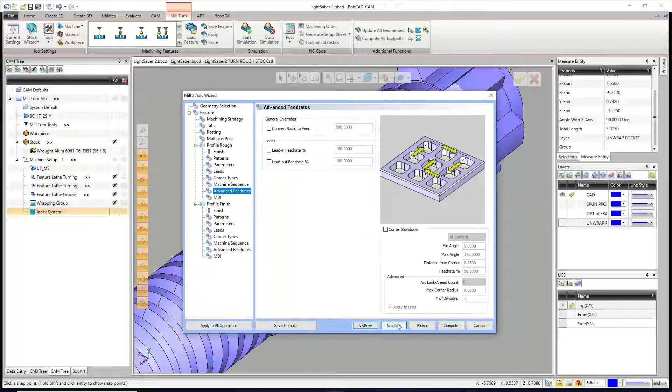This is a standard 2-axis toolpath. We're just using a feature that's going to call out on an index, so it's pretty easy. And then that's our 1/4-inch. Yep, so we'll use the same 1/4-inch tool for finishing. You could apply G41 comp at this point if you wanted. Other than that, I'm really just going to go with parallel leads, and that's it.

So we'll hit finish. I'm just going to give it a save just in case, and then I'll go and compute that. And we always want to look and make sure it's doing the right thing. So this should add a little radius into the corner. The biggest area we might have some problems is right at that corner, kind of just past where the radius is going to finish. There might be a little bit of meat left right there that's not perfectly clean, but we'll take a look at it in the simulation. Overall, that one looks all right. So we'll give that a save.

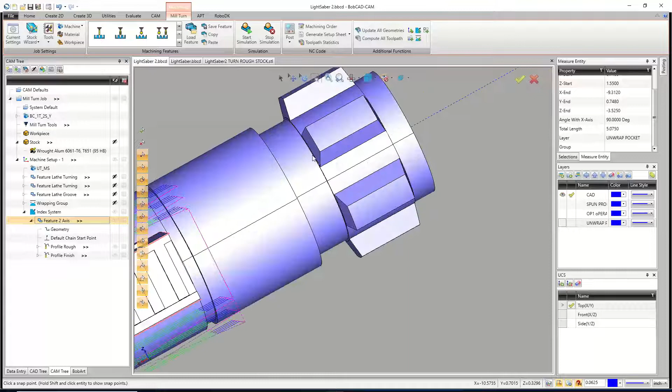So now what I want to do, using the same index system because it's aligned with the same view here, I want to go in and I just want to machine this little area here. The problem is before I can go and do that, I have some odd surfaces that I have to deal with. When I got this model, what you'll see is this floor that's here actually connects all the way around.

So I can't just go and pick the area I want to machine. I have to pick the whole part as the geometry, and then I have to give it a boundary to use. So what I'm going to do is I'm going to go to a front plane.

Now my front plane is cutting the part directly in half, but that front plane aligns with this side right here. They're parallel to each other. So we've got our front plane. I'm going to go to Create 2D, Extract Edges, and I'm going to project to the Z plane. I'll just say Z1. Or no, let's go Z-1.

There we go. And then I'm just going to go in and pick the surfaces that kind of align with this. So that one, that one, that one, and that one. And then I'll hit OK, and it'll flatten that all out. So now, well, hold on, let me do this. Let's add a new layer, call it boundary, and try that again. I'm going to make it a little easier on myself.

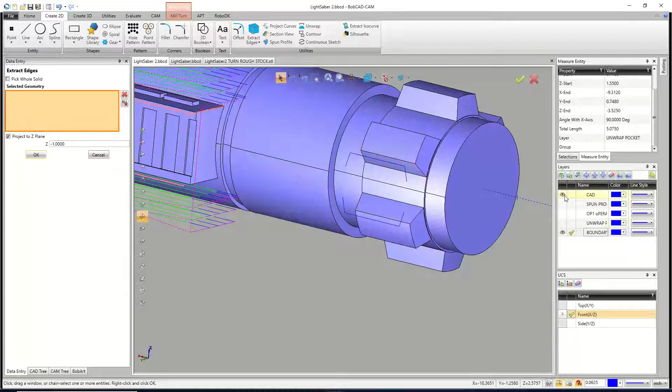There to there, there, there, there, and there. I'm just going to hit OK. And then I'll hide the CAD. And then all I've got to do is join a line across these, right here to right here. Now, the reason I can't use the boundary directly off the model is because I'd have to connect somehow right there. So I'm making my own boundary here.

It might need to be a little bit bigger, but I'm not too worried about it. So let's get this to work right there and right there. And so when we go back to a top view, that boundary that I drew is aligned not only with the index, but with the tools that are going to be used on that x-axis. So that's what I got.

So with that same index, we're going to try this out. We're going to right-click on Index System, Mill 3-axis. For our geometry, it's always the whole part, every single time. For the boundary, I'm just going to pick right there and hit OK. And we'll go next. We don't get any previews here.

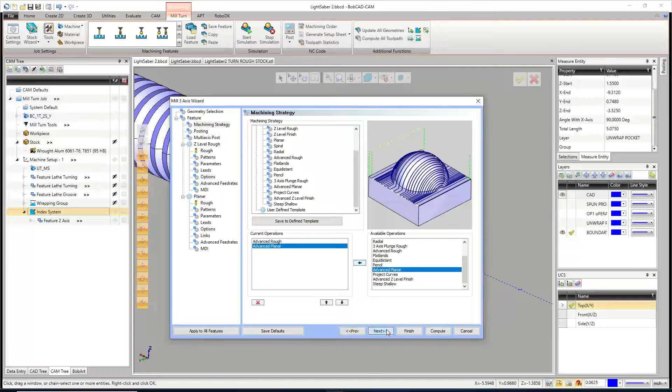Machining strategy. I'll use a little advanced rough, just to take out a little bit of the material that's in there, not too much. And then you have a choice. A Z-level finish could potentially work. I'm going to go with just the advanced planar. So the advanced rough, the advanced planar. Honestly, you could probably get away with just a standard planar as well, but I'll use the advanced one.

So our roughing tool, I'm going to use the 3/8 flat. And I'm not going to be too crazy with this. We're going to go with 3-axis. I'm not doing any 3+2 or anything on this. Offset pocket out, sure. The depth of cut and the step over, I want it to get in there a little bit, so I'll go 50 and 50, just so it has a couple passes to remove some of that material.

Leads, just going to plunge in. Options, nothing really to set up here. Just kind of next my way through, none of the settings really needed for that. Now we're going to use our finish tool, which is our 1/4-inch ball. And this will be 3-axis. We shouldn't have to do anything for the fact that it's 4-axis. We should be 3-axis because this is on an index system.

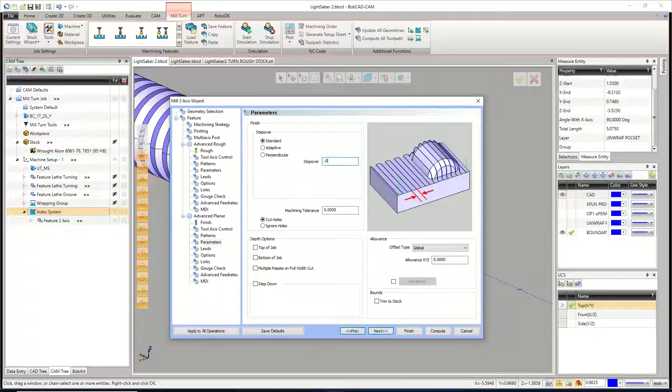So the lace angle, I'll leave it at 90. So that's going to go along the Y-axis when it cuts. Step over amount, let's say 10 thou. I want a nice clean finish there. Leads, don't really care. Options, nothing really to change other than usually if I see 3D extents, I turn it on.

Links, no real changes. Gouge check, no real changes. Advanced feeds, no real changes. And MDI, no changes. This one's a 3-axis toolpath. It will take a little bit longer to calculate. So what I'm going to do is finish this, save it, then I'll go calculate it. I'm just trying to save myself the time. If something happens, I don't really have to concern myself with it.

So there it is, little finish there. If we look at it, let's blank that thing out. Let's blank everything out. So here's my advanced rough. There is a lot of material missing from here. Part of it could be handled by right here. If I go to the parameters page for the toolpath, I can define the top of job as this right here and hit OK. And so what that'll actually give me when I recompute this, I'll just hit compute, is

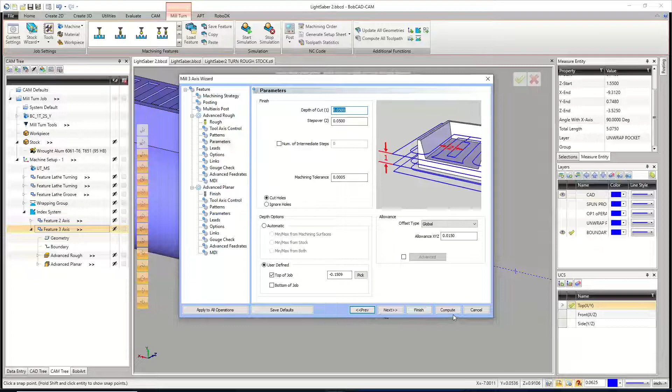a shorter set of rapids on there, a shorter set of cuts. So now it's going to be kind of just working in there. And even that's more than we really need. I really could start at the top of this, but I'll cut a little bit of air. And then there's our little planar toolpath, just like that.

So before we go and simulate it, though, I want to do all of those cuts. So I have to, but I'm lazy. And I don't want to have to go in and set up an index system for every single one of those because it's a lot of work and you have to know your angles. Not that it's difficult to figure out, but I could also go in and do a toolpath pattern.

And before I make a toolpath pattern around a 4-axis or around a rotary, I need a line down the middle of the geometry. So what I'm going to do is just make a line. That is X minus 12, and it goes to X1 right there. And what we're using this line for is for the toolpath pattern, it's going to tell it what line to revolve or what line to rotate all these toolpaths around.

So I can hit OK, cancel out, and then I'm going to right click on the feature 3-axis here and add a toolpath pattern. Now the pattern is going to be a rotate, and then I'll hit next. We have to make sure to turn on this 3D option. There is 6 of those around there, so my angle is going to be 360 divided by 6. I have 1 programmed already, so my copies is going to be 6 minus the 1, so 5.

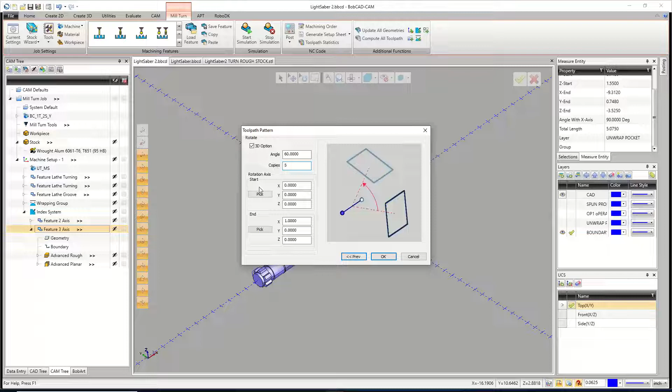And then right here's where we pick our rotation axis. So I could go in here and say it's right on the end here. I'll just pick the end point for that one and hit OK. And then I'll pick the end point for the other side right here and hit OK. And then I'm just going to hit OK. And so if we see that, look at that. Now we have all of them getting cut, just like that. And it's all the same toolpath. It's just a 60-degree rotation between each of them.

So once again, we'll give that a save. And let's see where we're at so far. I still haven't checked out what that thing's going to look like, so I'm interested. I'll turn the machine on so we can get a view of it. Let's hide the workpiece. What's the fixture right now? Oh, that's that. Okay, I'll leave the fixture on. There we go. All right, so here's our turns.

Little collisions there. We come back the other way. Cut our groove, and then our pocket. This one takes a little while. A lot of stuff going on here. And slow it down. Not that low. All right, there's a little finish to that. Not that we even need it because it's not finishing anything, but

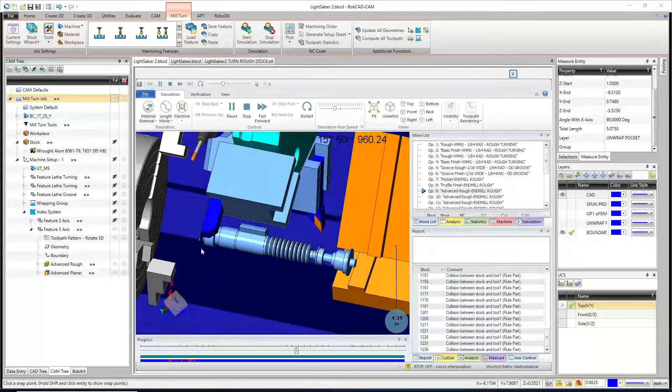oh, we got tools being used together. So there's our 3/8 little rougher for the back pieces. I have to go to the machining order and set it better. Let me turn this off so we can see the part getting cut. So you can see it's, you know, putting that little flat in there all the way around.

And then I believe, looking at this, yeah, then we're going to go do our advanced or our profile rough. So then it's going to go from doing all the roughing with the 3/8. It's going to switch to our 1/4 inch ball. Should do this first, and then it's going to come back and clean those up. So I'm okay with that.

So this should be the last one right here. And then we get into our 1/4 inch ball. And I don't know how this is going to look. It may not look great, but we're going to run it down there.

That's what I was worried about with that ball that we got. That's about as good as we're going to get unless we were to drop it a little further or use a smaller ball. Actually, not too shabby there. I don't hate it. And then the ball goes in and does the planar.

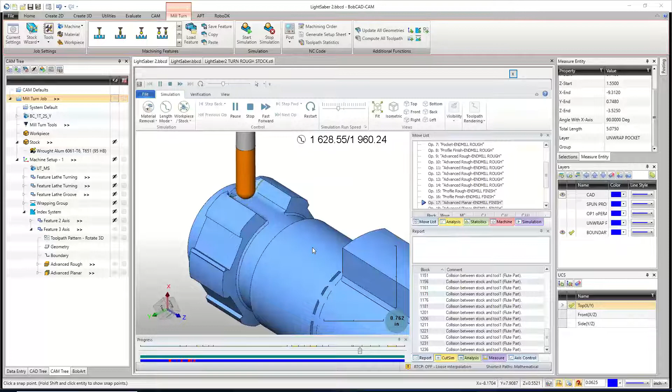And when you're watching your simulation run, don't look at the quality of it right now. You want to focus on the quality at the end of the job. A lot of this stuff will get cleaned up when it's all done, like all this jaggedness for that groove. As soon as it finishes, you'll see a cleanup pass be running.

So right there. Yeah, and then this should be the last one. And then again, now it's going to kind of clean up so you can see the groove. And there is those little cuts there. And if we take a look at it, not too bad so far.

Honestly, this is better than what I was getting yesterday right here, which is saying not much, honestly. I'd want to go a little tighter to that. It's a tough one, though, because I'd have to go with a smaller tool. Possibly if we went with a straighter tool, we could get in there, but then I risk potential gouges. I'll have to look at that a bit more, find out what's the best way of doing it.

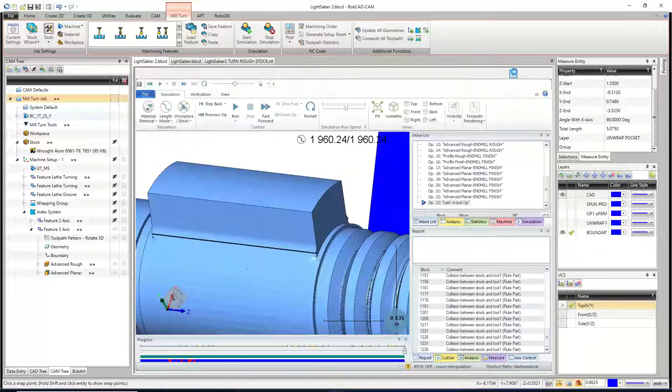Other thing is this little top thing right here. I didn't face that off yet. I didn't clean that up yet, so I need to do that. So we're gonna add a layer. Let's call this index facing. I'm just going to, yeah, right there. I'm going to just pull the wireframe off this.

So I'm going to go again to create 2D, extract edges, and let's see, that's projecting to Z minus 1. I'll go Z minus 1.5. Let's see if that gets us up above. Yeah, that's perfect. Okay, so I'm just going to pick all that like so. And then if I hide all the rest of this stuff, we're left with a bunch of geometry that looks like so.

So now what I'm going to do is delete pretty much this whole bottom half, minus the 2 lines and 2 of these, just that one and that one, and I'll delete all the rest. Now I'm going to go up to utilities and trim 2 entities, and extend those to meet each other. So I've basically just given myself a little rectangle that I'm going to use to face off the geometry on that right there.

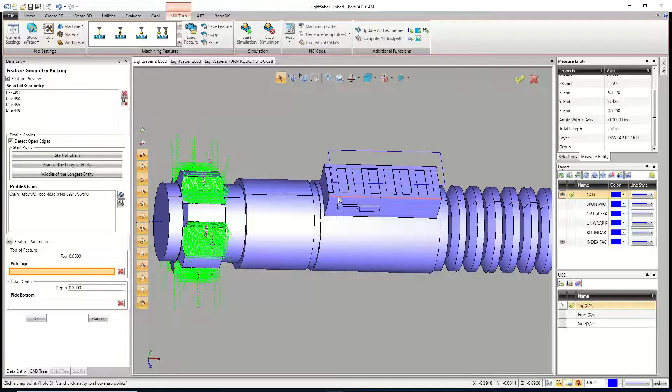So I'm going to right click and do a mill feature. Now there is a mill facing, but this one's looking specifically at the stock, which could cause us problems. I want to go and say mill 2 axis, pick my geometry. So I'm going to pick it right there. And my origin, the top of it's right here. I do have a little bit of meat on there though.

Wait, what's going on here? Oh, I forgot to, hold on. I got to right click on my index system. All right, so we'll do a mill 2 axis, select my geometry. So again, this will show it better. So there it is. Top of part is at 0.0991. That's how much is sitting on top of that.

So all I'm going to be taking off is, well, actually, I'll just say pick bottom and pick right there. And it should be the same value. So we'll pick that, hit next. Next again, right here we can choose facing. So facing isn't just a toolpath by itself. It is available in the 2 axis as well, which I like because it gives me more control over it.

I don't have a big tool for this. I'll just use my 3/8 and kind of clean it up. We'll go off the part by half the tool. We'll zigzag. We'll do a 40% step over. Parameters, no changes there. We'll do the full amount in one shot.

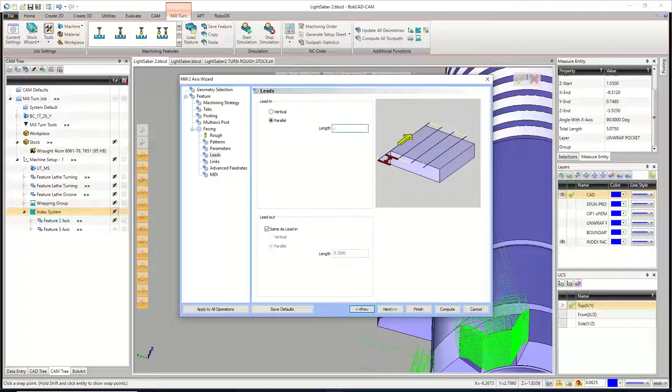Leads, I usually put a lead on and I make it half the tool, at least, whatever the radius of the tool is. Links, not going to change that. Feed rates, don't care. And then I'm going to hit compute. And there's our quick little facing pass on that.

So now what we can do, and let's try something here. This might give us this corner potentially better. Let's see. So I want to do another index. So I'm going to right click here.

I'm going to do an additional function. I'll say add index, and this index is going to be off that face right there. If this works, we're going to have one on the other side as well. I want to use this toolpath, I believe, the 1/4-inch ball right there. I'm going to copy that toolpath and paste it under this index system.

For my geometry here, I'm going to reselect and pick this edge right here, so the tool is going to come in right there, offset a little bit. For the top, I'll say it's this right here, that's 0, so let's go 0.5. And the total depth I'm going to go is 0.5. I just want to see if this works. Hit that, and then I'll go compute the tool path.

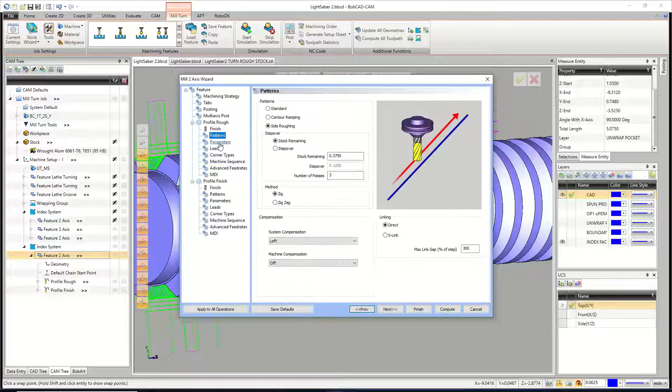We have to reverse the direction, I believe, and then compute the tool path again. So there it is. I'm going to get rid of the extra. I'm going to be slicing through those little buttons, but whatever, those buttons will be different anyway, I'll make them pockets or something. I don't care, I'm not going to do a side rough.

Just the one pass, that should be offset. I don't know, let me see. Let's think here. I'm trying to think of how we might be getting that cleaner right there, but I got no real great ideas off the top of my head. Let's save it and see what this does first. What I'm thinking we might, I don't know. We shouldn't gouge it, but I don't know if it's going to clean it up as nicely as I want it to be cleaned up. So let's just take a look.

We'll find out, won't we? We're on this May the 4th journey together. All right, machine, I have no idea which tool path it is. Oh, it should be the last one. Right there.

So no errors loading the simulation, which is fantastic. Let's say run, and that should rotate. Okay, you son of a gun. Couldn't even see it. All right, so there it is. Meh, kind of didn't do anything there.

Yeah, it was a shot in the dark because we're offsetting off that edge. What I may be able to do is just get kind of weird with it. I don't even need the profile, I'm going to get rid of the profile rough and just leave the finish. What I could do is put a negative allowance, let's do 50 thousandths first, just to give it something. It's probably way too much, but this could be an idea on potentially getting a little closer into there. Basically I'm kind of lying about the tool, using a negative allowance, so it's saying the tool's only 200 thousandths wide, which might potentially get me into that area a little bit better. Maybe too much, we'll have to find out.

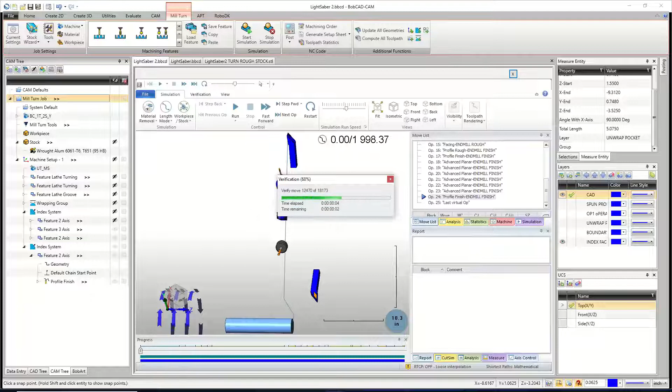But we'll go ahead and get down to right there, and yeah, we'll let it run. And then, holy cow, that was beautiful. That looks pretty decent now for just guessing a number.

That wasn't too bad. Now it's got a little divot there. I went 50 thou on that. We might be able to go a little less, but honestly that would be totally fine with me. I'm not trying to make these for real, lightsabers aren't real, so this is just a collectible item for myself. That's actually not too bad. Looking at it, we could maybe back it off a little bit, maybe go for like 45 thou instead of 50, 40 thou, whatever it is. But I'm happy with that for now.

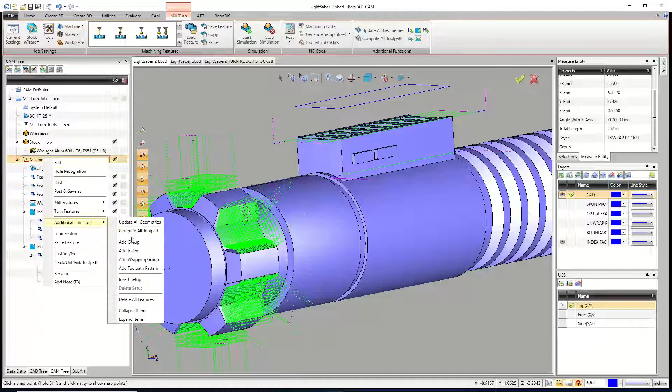I'm going to go do this side, same exact tool path. All we got to do is make a new index, so I'm just going to add an index. This one's on this side right here. And I'll hit OK.

One thing I'll be honest, I didn't draw this thing, I found it online. It's not too outrageous of a drawing to do now that I'm looking at everything, it's really not too bad to draw, but I found it online because I didn't need to draw it. But if I was drawing this and did it all myself, I would try and put a little fillet on there just so you have a little blend, a little bit better. Having a sharp corner on a round part, it's just a difficult cut to make.

So now I can take the feature 2 axis. I'm going to copy it and paste that feature. It should ask me if I want to use the same top and depth - yes, I do. For the geometry, I'm just going to pick that edge right there. I'll hit OK, and then compute it because the direction might be wrong, but it is not. That looks good.

Are we going to clip over there at all? No, we should be fine. All right, so let's think - is there anything major that I'm missing?

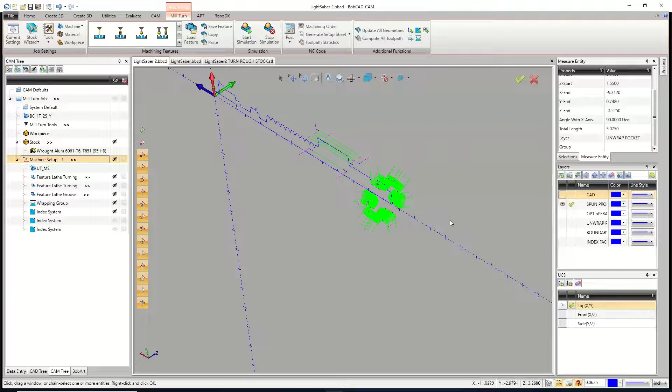I'm going to go do one last tool path I know I'll need eventually, but I might as well knock it out real quick, which is the cutoff. I haven't mounted this tool, so let's just do a lathe cutoff. Geometry is going to go right to there, and for my machining strategy, it's just going to be a cutoff.

Again, I haven't mounted this tool yet, so I got to go to the tool crib. I've been doing all my even numbers as milling positions on this machine, so all my odd numbers will be turns. So I'll add an adapter.

We're going to add a side mount turning X adapter. I'm going to mount it to the side face, so there it is. And if you guys didn't know it, whenever you create a tool that shows up as a loose tool, you can actually just grab it and drag it onto your holders after you place them. You just have to remember to go apply your shift. So I'm going to put a -3 for the shift to pull that out of the holder, hit OK.

And then this is our cutoff. So right there's all our numbers. Great, looks good, hit compute. Quick cutoff. All right, so we'll give that a save, and let's check out the whole thing right quick.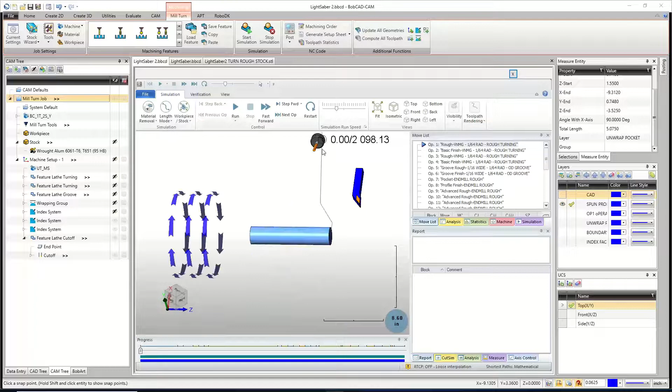If you guys have any questions at any point, feel free to ask. This is one of those, just kind of going through it, kind of experiencing what I figure you guys run into when you're using this, because there's no perfect answer to what toolpath you're going to use all the time. So sometimes you have a fight with it. Honestly, this is going a bit smoother than it was for me yesterday. I was having a lot of gouges and stuff. I had a bunch of different routines too that I was working on.

See, collision between flute and stock - I got to put better leads on it. Flutes, I'm missing so much of it though. All right, so this is where we start taking down the milling stuff.

And the last thing we're going to do here to finish up, I got to go create the geometry still, but I want to go in and create some text around that front face, right around this little guy here. We're going to do some text that kind of cuts around there and engrave it in and see what we get. So we're going to continue this.

Yeah, a little faster there. Get a drink.

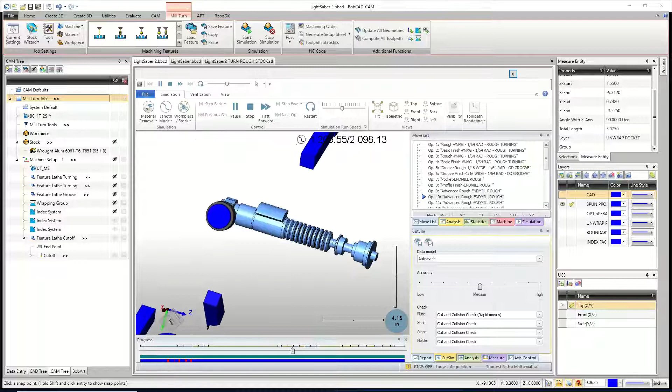All right, I'm interested to see how this thing all comes out. There's the one - there's our planars. Right there.

I don't want to go too fast because I don't want to miss the little bits that we got at the end here, because they are quick.

There was our cutoff - what happened with the cutoff there? Fast forward right to the cutoff.

Come on. Oh, come on, there we go. Oh, I got the wrong cutoff tool. Yeah, I accidentally picked a grooving tool. Huh, that makes sense. All right, so let me change this tool.

Change tool - yes, and I want to choose my cutoff. There we go, I got a longer cutoff right there. Much better, okay, hit it. All right, that's a lot better. So that'll do our cutoff. All right, so I'm not worried about the cutoff.

That was fine. So now what I'm going to do is I'm going to switch to a side plane UCS right here, so that I can draw right around that face right there. And we'll put this in there where it's going to fit. I still have to put the tool in and everything, but let's go do this.

Let's just call this layer text. And what I'm going to do is I'm going to extract the edges from this right here, from that surface and that right there - so both of them - so I kind of know what I have to fit my text into.

I don't need that one if I'm picking the other one, so we'll just pick that surface. And I am going to project it to Z0 right there, so I have just the face.

Okay, so now that I can look on this CAD, let me go to a view here. We're going to go right there. By the way, if you guys didn't know, this is new, might have been 33. This button right down here is views to active UCS. If that button is not turned on, when I go and click a top view, it's going to show me the top view of what the top UCS uses.

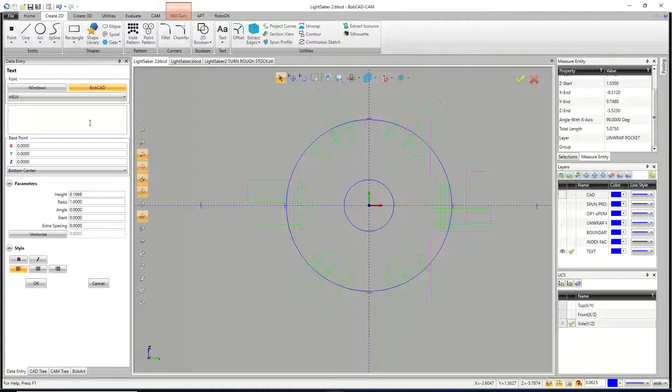So I'm going to say 'May the 4th, if I can type, be with you.' Should that be 'with you'?

All right, so that's all my text. Now, it might be too big, I'm going to find out here in a second. But basically, I want to wrap it around this face here. So the biggest thing about using this to wrap around is you cannot click the vectorize button. If you click this vectorize button, you break all your text into separate entities, separate lines and arcs. We need it all grouped together. So I'm just going to hit OK and cancel out.

Now, this is where it could be a little funky. I would like it to wrap all the way around, and I'm wondering if I shouldn't. Let me see real quick, let's do a cleanup optimize, just going to see if I can rebuild these. All right, so I rebuilt this arc into a single piece.

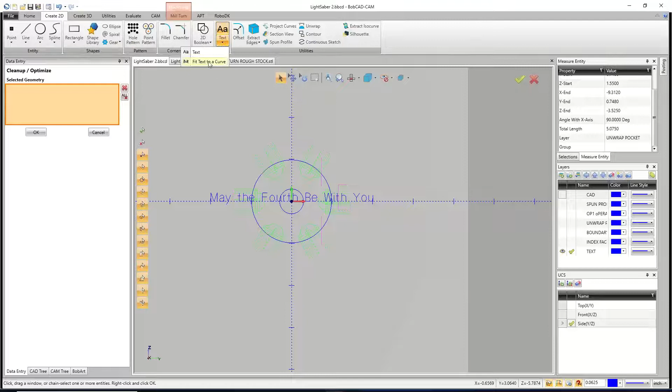And so now I'm going to go to text, I'm going to say fit text to a curve. The text I'd like to fit is this, and the curve, I'm just going to hold shift and pick this geometry here. So we'll see that puts it on the inside, but I want to reverse the direction of that chain, which apparently doesn't let me do. Yeah, there we go, reverse it. So there it is like that, but that's not the way I wanted my text to come out.

So let me try a different curve to use. Let's try and hold shift and pick this thing. Curve's too short, that's what I figured would happen. Can I do a distance from the path, and will that curve still be too short? Whoops, 0.25, is that still? Curve's too short. Okay, fine.

Let me do, that's about 4 inches long, almost exact. So what is that? If I was to do 4 divided by 3.14159, so 1.27 diameter would be there. Let me see that real quick. Let me just say my diameter is 1.25. All right, let's see if that does it.

So we'll go text, fit text to a curve. Might not be enough, but we'll find out. That's our text, there's our curve that I want to use. Too short, okay, so I'll go a little bit bigger. I get it, I'm trying to cancel.

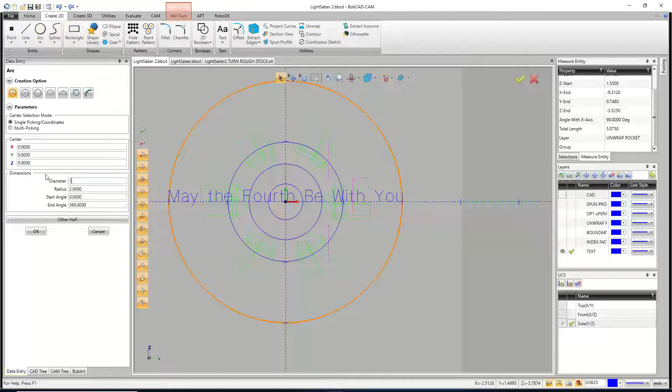So there was that arc, and that was, what did I do for that one? I don't remember, what did we do? We came up with 1.27. I'm going to go 2-inch diameter right here and hit OK. Oh wow, that was a big difference. What is it, I'll do 1.5 for the diameter. Yeah, let's try 1.5. All right, that one should work.

If we look at the length of that chain, 4.7, so that should be enough to fit it. And now we'll try our text, fit text to a curve. Distance from the path for now, we're going to put at 0. Pick the text, pick the shape.

Reverse the direction of it. Come on. There we go. May the 4th be with you.

And then for our distance from the path, we can actually use a negative value here. So we could put a minus 0.0625 or something. And that's just going to kind of shift those letters in, something like that. Can I go even smaller? Let's do minus 0.125. Hey, that looks pretty good.

Oh, it's raining. All right, good.

Move text from the start. Yeah, we could shift it, I believe. Let's do middle. What's that look like? Let's do end. What's that look like? Shift it around 1 inch. Ooh, that doesn't work. Zero that out. So I guess it doesn't matter where it comes out. So I'll hit OK on that, and there is our text.

So now I'm just going to get rid of the arcs that are on here. And that should be the text that we want on the front face of this little guy. And so now we'll go in and we'll set up a tool for that. We'll go tool crib. I'll go position 10, add from the library. We'll do a VDI. And I want a face milling adapter. Is that the one I want? Yeah, right there. So there it is.

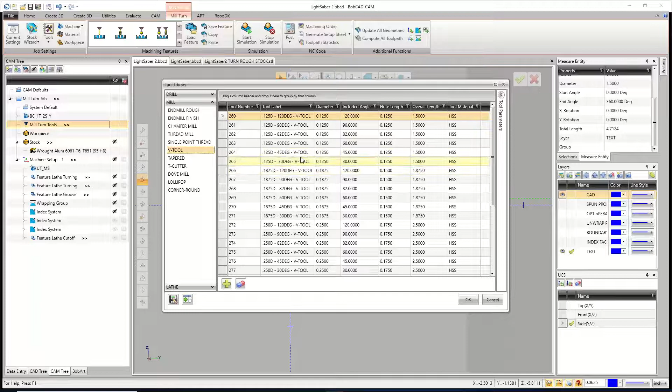Let me add a tool. I want to go back to that V tool. It looked extremely short just now, sticking out of there. And I do need it to kind of reach through something. Flute length, overall length is 1.5 inches, should be fine. All right, pick it again. It seems excessively short, though. But I guess if that's 1.5, that's 1.5, right? All right, so there's our little V tool.

The tool path I'm going to use is going to be, we'll do that, we're going to go with a mill feature. I'm going to do a mill 3-axis wireframe. Pick my geometry. We're going to go right on the text layer. Pick the text. Oh, I got to explode it first. Hold on. Let me try that. Utilities, explode. I'm going to explode all that. Hit OK. Cancel out. Try it again.

Mill features, 3-axis wireframe. Select geometry. We're going to pick that. That looks better. The top of feature, I do need to go in and pick that edge right there so it knows how far to start down. And then we're going to use the engrave rough. I'm not going to put a finish pass on it. It's just kind of a chase pass anyway.

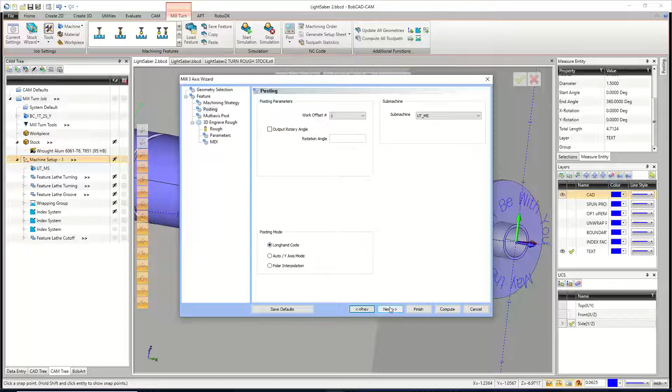Depending on your machine, longhand code, auto y-axis, or polar interpolation. I'm going to go with just longhand for now. Try and keep the y-axis out of it if I can. But you may need to. And then I'm going to go to the tool crib, find my V tool.

Okay. And step distance. So this is where we define how deep we want to cut that geometry into the face of the model. But it's not like your normal depth of cuts that you normally set up. So like a 2-axis, you say, I want to go a 1/2 inch deep. It knows it's a 1/2 inch deep. It's asking you how many passes you want to use to get to that 1/2 inch deep.

With this one, whatever distance you have here, you're going to multiply by your number of cuts. And so if you want to go, I'm going to go 50 thousandths deep. Or we'll do, what do we got? Stick out, flute length. We'll go 100 thousandths deep. So if I was to say 0.1, a lot of people get confused with this one because they go, I want to do 100 thousandths and I want to do it in 2 passes. What we're seeing now is a 200 thousandths total depth of cut. It's going to do 2 passes each at 100 thousandths.

So whenever you're doing your distances for this engrave rough, multiply these two together. So I'm going to go with 50 thou times 2, and we're going to cut from the geometry. By setting our top of job to right down there, we're essentially telling it that the text is down there. So it's going to cut from the text into the part, 100 thousandths. I should have enough meat there. We'll find out. And I use this one for all of my engraving, even if it's just 2-axis, just because I like it. And that didn't change the top of feature, though.

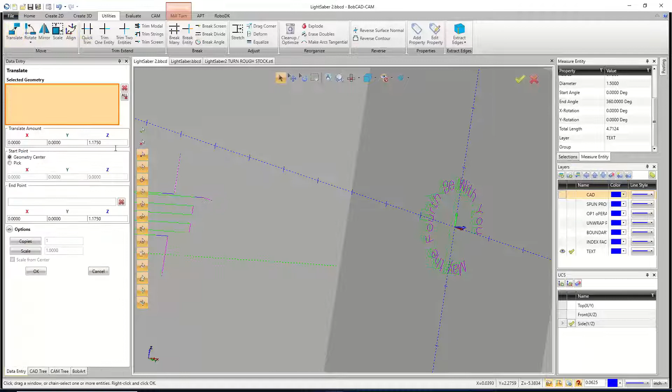Pick top. Yeah, the top's there. All right, so I'm just going to use this value here. Let me copy this, cancel out. And I'm just going to take that text and I'm going to sink it down because it didn't work. So utilities, translate. I'm going to go ahead and do this in Z because I copied that value. I'm going to grab that text, hit OK, cancel out. And then finally, we'll just go in, reselect the old geometry so it learns the new position, recompute the toolpath.

So there it is. I can already tell you we're going to have some collisions. So we need to go in here and set our clearance or our rapid plane to higher than this number right here. Usually the way I do it, because I always like to have 200 thousandths, you take that number and you add it to this. So plus 0.3937. And that'll ensure that I'm 200 thousandths in front of my part when I do my moves. So I'll hit compute. And you'll see now those rapids will be over it. And again, they should be over it by about 200 thousandths.

So wasted a little time, maybe pick geometry different. I don't know. But there it is. So now what we can do is take that guy and we'll move it up to, we'll do it before the cutoff. We'll just switch it with the cutoff. So now we'll do that engrave and then the cutoff. So give it a save before you start your simulation. Every single time, save before you start your simulation.

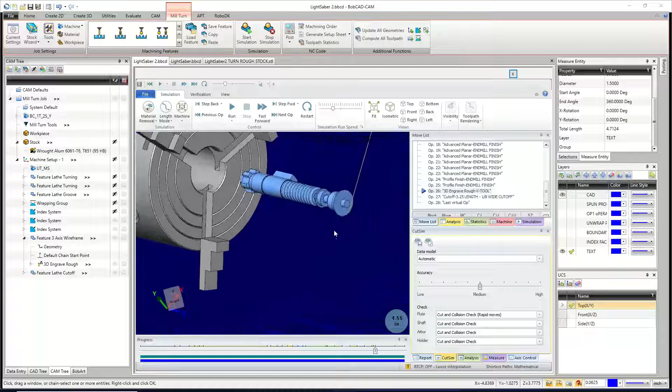All right, and yeah, right here, coming in. Let's get down to, we're going to look for our 3-axis wireframe. So right down here, or 3D engrave rough is what it's called. And this one should, let's turn on the machine mode. I want to get a decent view of this thing, but it's tough because the tool might get in the way. But all right, so slow it down a little, run.

This is the worst part. You slow it down, but then the stupid turret takes forever to get to position. So you're waiting for that. And then as soon as it starts running toolpaths, it's fast again. It runs them like crazy. Come on, you can do it. Should be coming in here shortly. Yeah, there we go. All right, that's what I wanted to see. So this should be spinning around. I don't know what this toolpath over here is saying it's doing, but there it is.

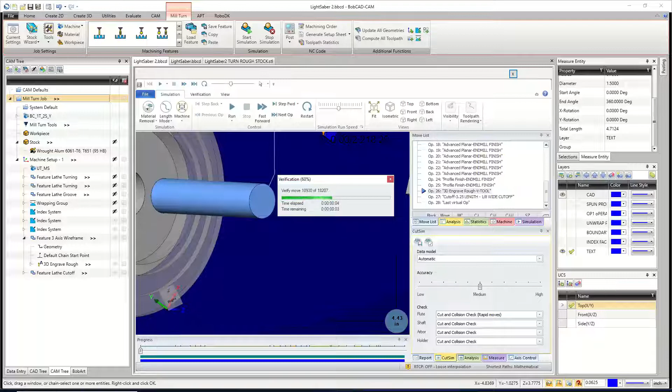We should have enough. Ooh, we might be going way too deep on that. That looks like we are. All right, 20 thousandths is probably fine. Let's go edit this. Let's just do a 20 thou in one pass, compute, and we'll just go ahead and restart the simulation real quick. This should be a bit nicer this time. Oh, man, didn't mean to hit the cutoff. Hold on. My mistake. All right, there we go.

So now we'll go ahead and run it. I don't know why it's jumping around so much. It didn't pick any sort of direction to go with on that, but oh, and then we have a cutoff happening. So the part's spinning during the cutoff. That's why the geometry just disappeared. We have to wait for it to finish, and there it is.

May the 4th be with you.

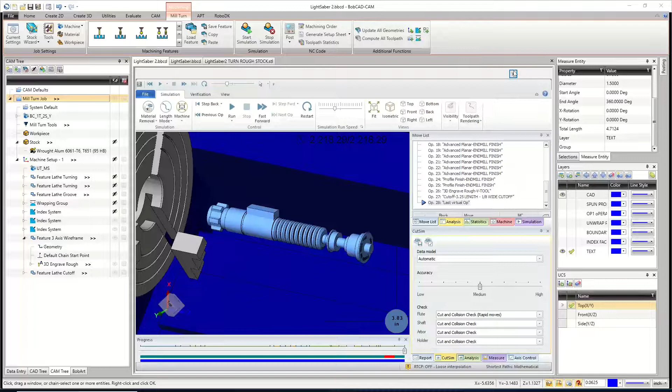Man, it looks so crappy. Hold on, I'm letting it kind of clean up. That's looking better. All right. There it is. So fun little project. It was just something we thought would be fun for the 4th of May. I doubt anyone's going to run this. If you guys want to, you can. Absolutely. I'll even send you the file if you're interested. Otherwise, yeah, just a fun little project. I got the file off of GrabCAD. Didn't have to repair too much. It was a pretty decent model, but yeah, there it is.

So a lightsaber. There's still more detail. Like I didn't cut these pockets in. I didn't feel like setting up a tiny tool to do it. These little sections right here, these little things, I don't know. For me, I'd probably end up machining them out and putting little something standing in there. Or I'd have to go in and get a real tiny tool that goes in there, which I didn't feel like doing all that. So there it is. Goofy little project, but fun stuff. So let me give that a save.